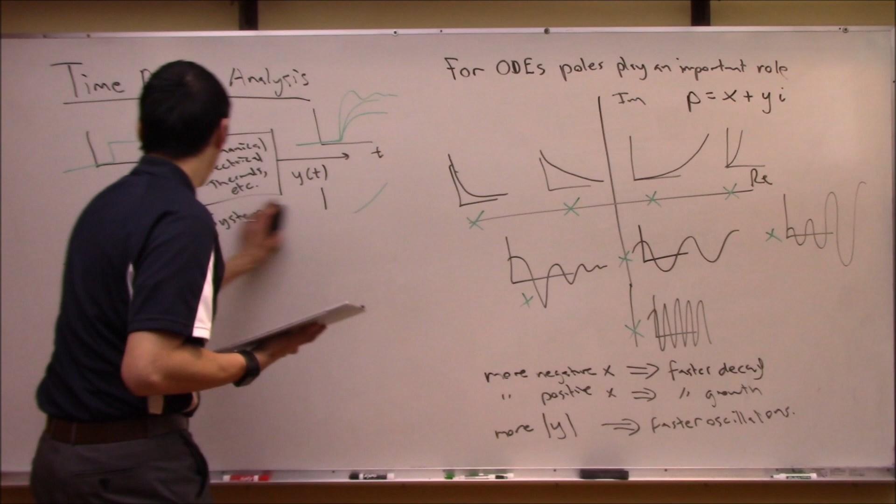So this is some flavor of time domain analysis here, but we would like to get a little bit more precise and make more careful predictions on what the system is going to do and how we're going to measure those performances. In this discussion, let's focus on first order systems. Before that, let's discuss some differences between the transient and steady state response of a system, because both play a part in our discussion of time domain analysis.

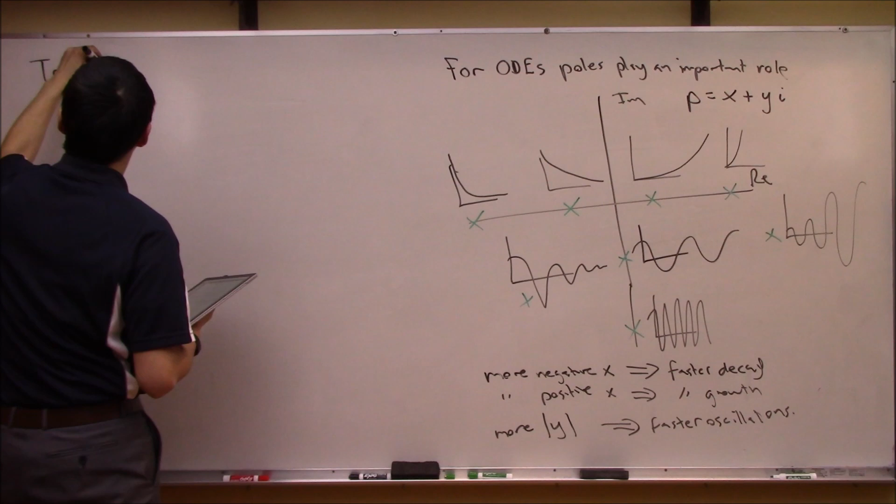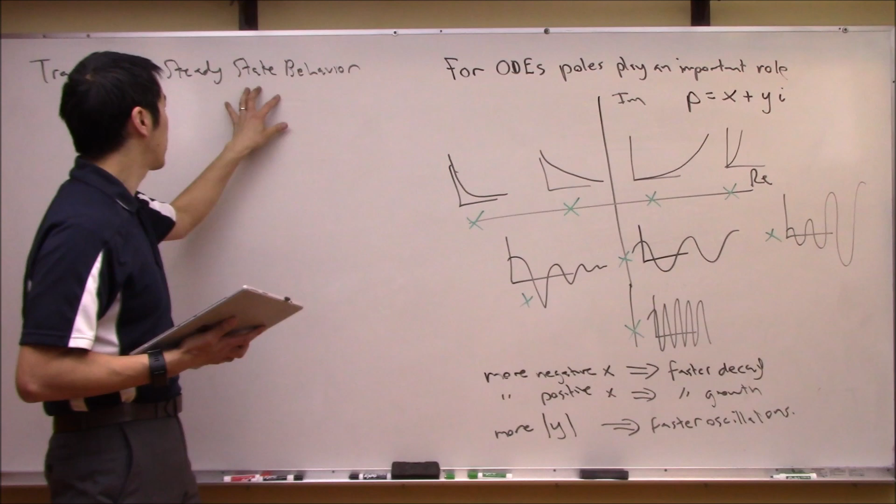We should talk about the terminology of transient versus steady state behavior. If you watched our previous videos on final value theorem and DC gain, you understand some of the steady state behavior, but we should formalize what we mean by transient here. Maybe formalize is a little strong, because you can explain these using very general terms.

The idea here is your transient response is basically the process of going from the initial state to close to the final state. So the process of going from initial state to steady state.

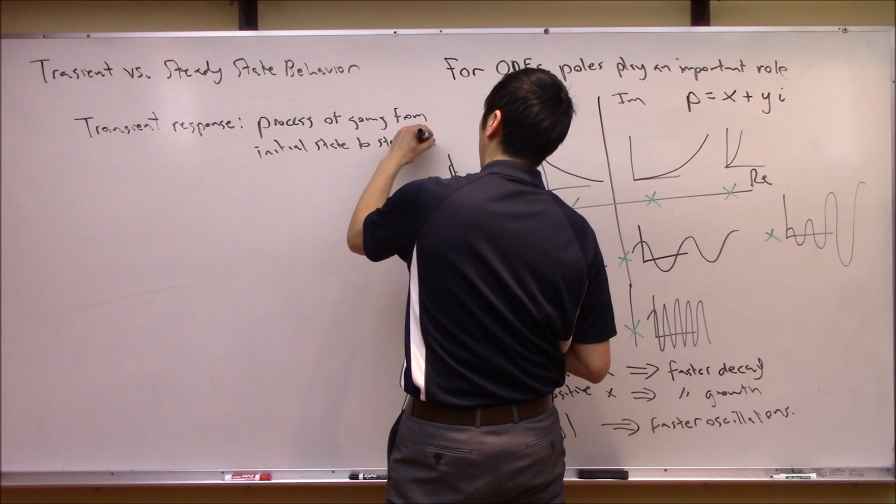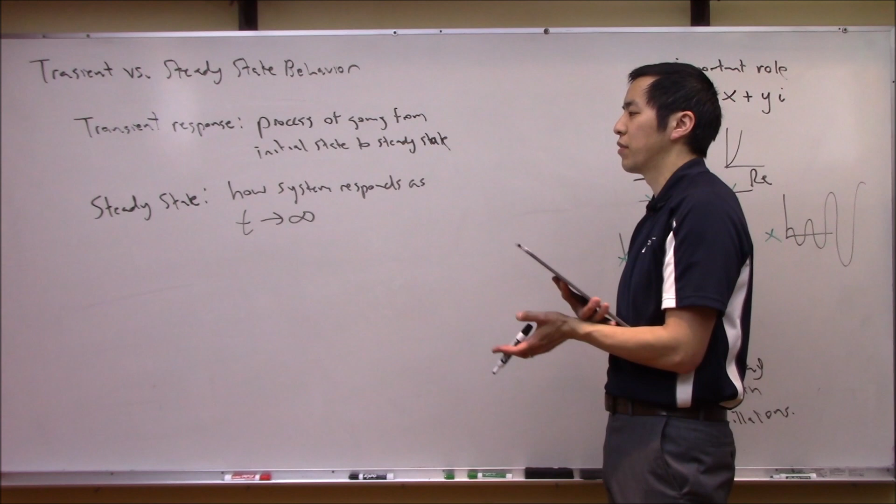The other half we want to look at is the steady state behavior. This is how the system responds as t goes to infinity, right? So as time grows large and some of these initial conditions or homogeneous solutions die away, what does the system do here? Let me give you a very quick graphical example of this.

Let's say you had some system here, and again we could model this as a transfer function or some ordinary differential equation. You put in some input, like a step input, and the output might look something like this. So here's y of t versus t.

In this picture, this portion of the response—it's not clear exactly where it ends—but this is sort of your transient. And then over here is the steady state response.

So you can see the transient has something to do with initial conditions or a difference between the input and the initial state. Maybe I should have drawn this with a negative initial condition instead. That's a little more representative here, because it shows you could have non-zero initial conditions and all this kind of stuff. But at the end of the day, all of those initial conditions and their effects should die away, and you should end up with some steady state behavior.

In this case, you see the system seems to go to a final value here, and this connects to our discussion of the final value theorem and DC gain of a system. But it doesn't have to be this way—your steady state behavior might not go to just a constant. You might have the steady state behavior of your system be a function instead.

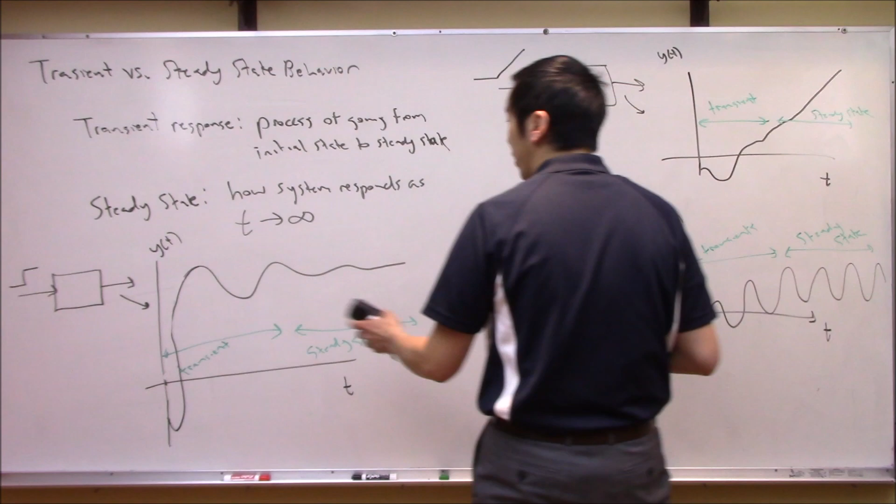All they're really talking about is predicting the behavior of the system without having to analytically solve the equations here. So you might wonder, do I really care about this? Is this really important? And the answer is yes, because if we're dealing with dynamic systems, both the transient and the steady state behavior are incredibly important.

The reason you've got to worry about this is, your system usually has to run in steady state behavior for the majority of the time.

However, you need to be able to get to steady state behavior without failing. So the system must be able to get to steady state without failing. In other words, it needs to get through the transient response safely without failing.

One urban legend I heard when learning this from my professor: back in the 70s at our university, there was a fraternity with a balcony on the second floor, and some students decided to start their own bungee jumping expedition. So what they ended up doing was tying a bungee onto it, and they weren't the smartest, but they weren't the dumbest students either, so they knew they had to test this thing first.

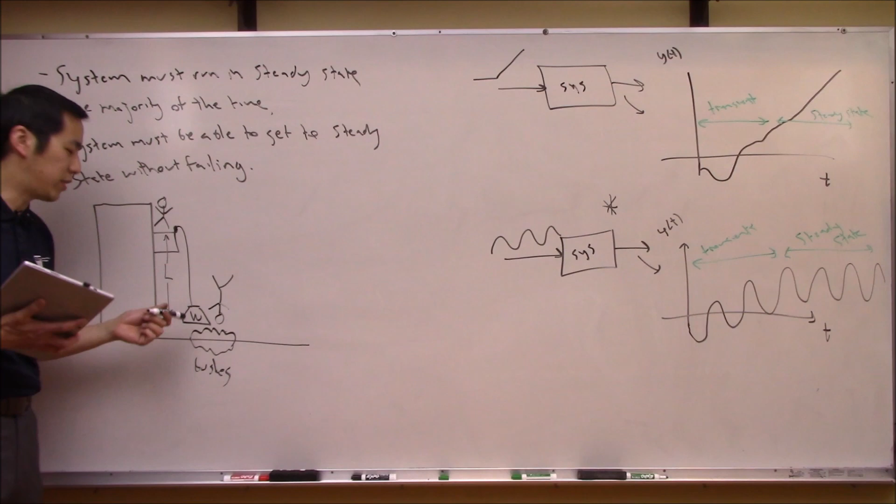And what we want to do with time domain analysis is understand: is there a way we could have predicted how much overshoot or how long it would take to settle, before you actually go out and build your system?

All right, here we are on top of the second floor balcony. Let's measure out how much rope we're gonna need to make this bungee jump. I think I remember from my statics class that at steady state equilibrium, the force from the bungee should equal my weight. So let's go ahead and lower myself down slowly, and once I reach the ground, that'll tell us how much rope we need. Here we go. Keep it going, dude. A little lower, a little lower. There we go, that's perfect. Look at that, this is gonna be so sick. This is exactly the right length of bungee cord so it's steady state equilibrium, we're just gonna be hanging right here above the concrete. Okay, let's bring it back up and give it a try. All right, here we go. Wish me luck, dudes. Cowabunga! Uh-oh.

Okay, so we saw why transient analysis in combination with steady state analysis is important. So what I want to do now is consider first order systems, and look at doing time domain analysis for just this type of system. Later on, in one of our following videos, we'll talk about second order and higher order systems, but I think it helps to start with the simplest system and work our way up from there.

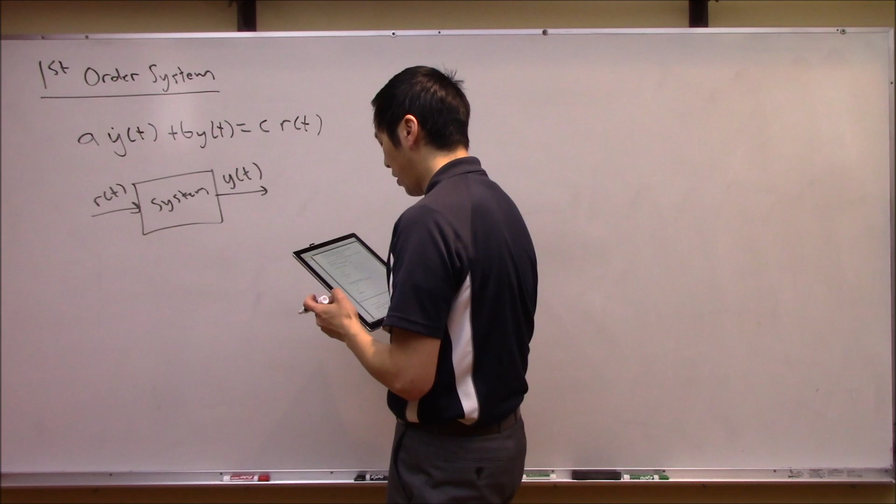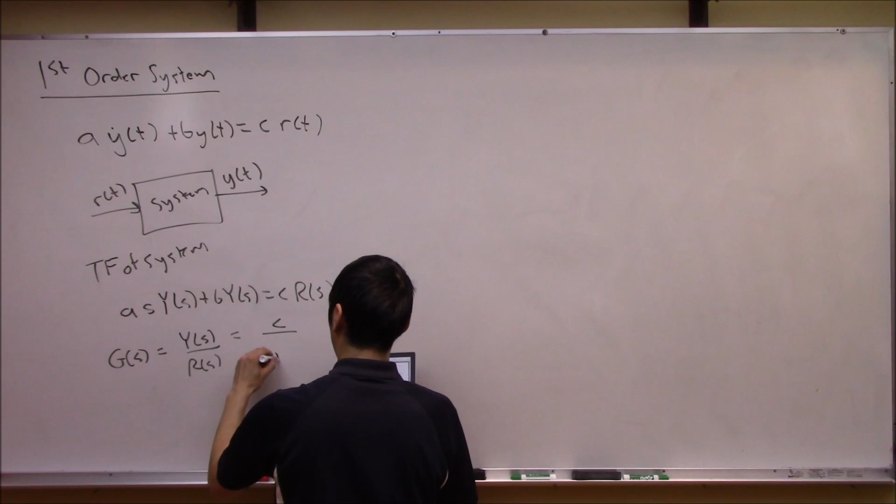We can easily compute the transfer function of this system. If we Laplace transform both sides and neglect initial conditions, we get a s y of s plus b y of s is equal to c r of s. If we solve now for the transfer function, which is the output over the input, we can get this thing to look like c over as plus b. So here's what our system looks like. Maybe the other way we could represent this is instead of just calling this system here, we call this thing c over as plus b.

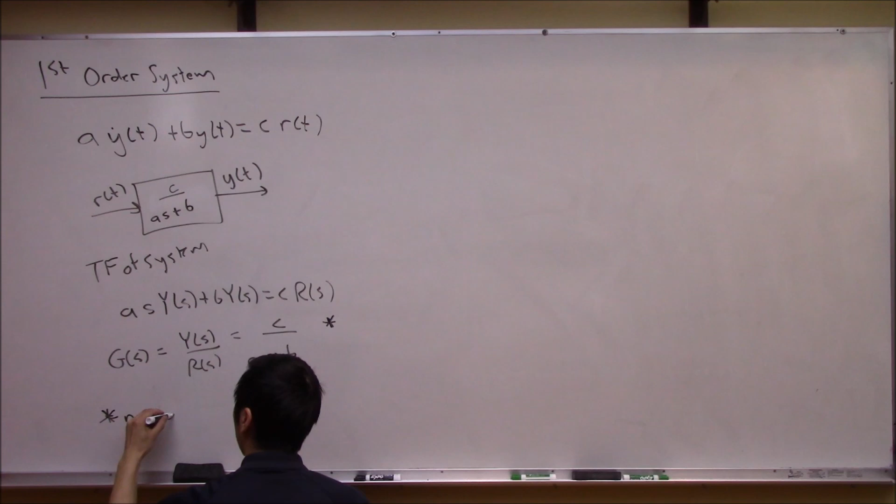The thing I do want to mention here, and keep in the back of your head, is that with our transfer function, we neglected initial conditions. We will come back to that in a second and show that this is of no real consequence, but let's put a little asterisk here and note that we neglected initial conditions.

Okay, so what we can do here is a couple of things. First off, let's make a quick note that the DC gain of the system - remember from our previous video where we talked about DC gain, we saw that you can obtain the DC gain of a system by just taking its transfer function and evaluating it at s equal to 0. So we see that the DC gain of this system is not unity, it's c over b. Let's keep that in the back of our head.

Okay, so what we can also do now is start looking at the performance of this system, or some metrics that might quantify how this system behaves in both transient and steady state. So one of the steady state parameters we can look at is steady state error - in other words, how does the output track the input at steady state? From our previous discussion where we talked about DC gain, we saw that the steady state error of a system in response to a step input, for any order system, first, second, whatever, is this here. So this is steady state error, and we should quantify this with respect to a step of magnitude A.

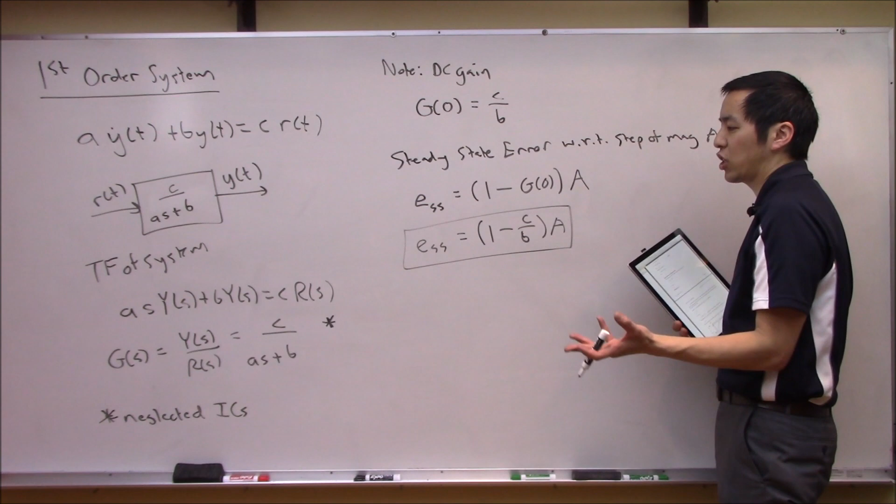Okay, so we just put this in here. We already have the DC gain, so we have this is 1 minus c over b times A. So here's our steady state error. Okay, you could box that up and say here's some performance metric, or here's some prediction of the system that we didn't actually have to solve for. If you know these c, b, and A, you can plug it in right away and understand the steady state behavior, the steady state error of the system.

Now, let's look at something that's a little bit more interesting. Tell you what, let's erase this so we get a little bit more real estate here. Let's look at what we're going to call the settling time.

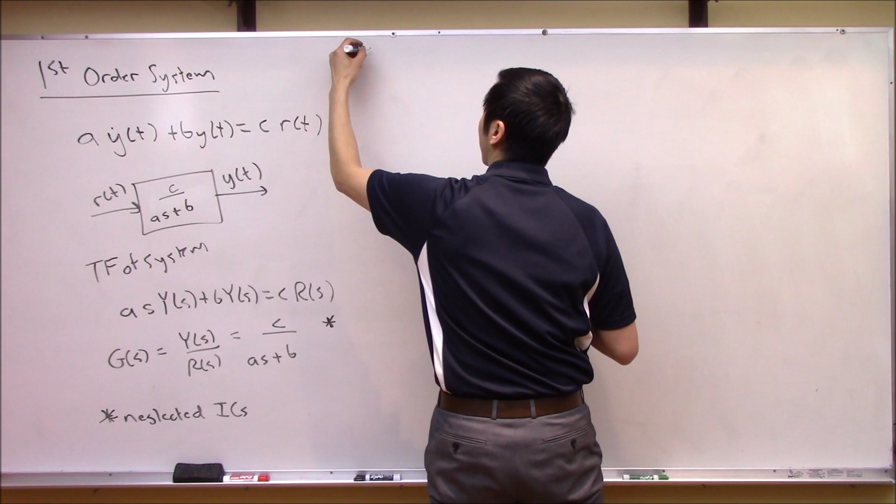Let's call this TS. So the settling time is basically the time required for the system to reach within a specified bound. Let's call this bound delta of the final value.

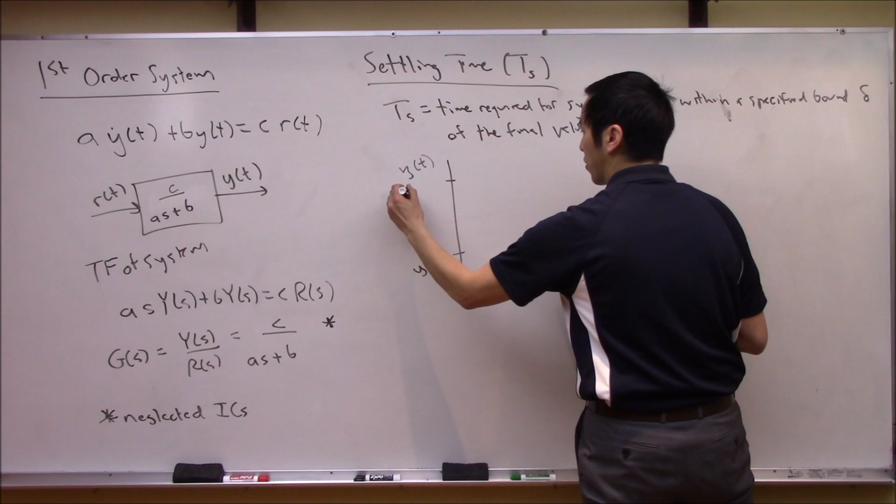So the picture that goes along with this: if you have a first order system, we know what this is going to look like. You start at some initial condition y0, some initial output, and this thing is going to go to some steady state value. We just saw it has a DC gain, and assuming the input is a step input...

This is going to asymptotically approach this. So what we see here is that there is a change in signal going from the initial condition to y steady state. Let's call this distance delta y, your change in output signal.

What we're looking for now is when does this response of the system reach some bound? I'll draw it like this, and it can go plus or minus if you're coming in from the other side. The distance between the steady state value to one end of this bound is little delta times big delta y. So this entire region here is 2 times delta times delta y.

So the settling time is this point right here, when it first reaches within this bound. So the settling time is this value here, again assuming everything starts at time 0.

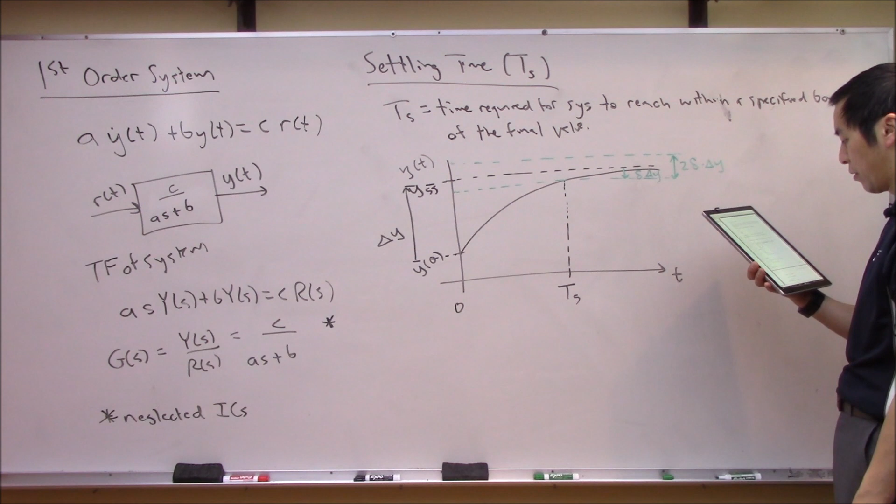One other thing that would be helpful with this picture: if this is delta y and this little region here is little delta times big delta y, then this distance right here, I think we'll all agree, is 1 minus little delta times big delta y.

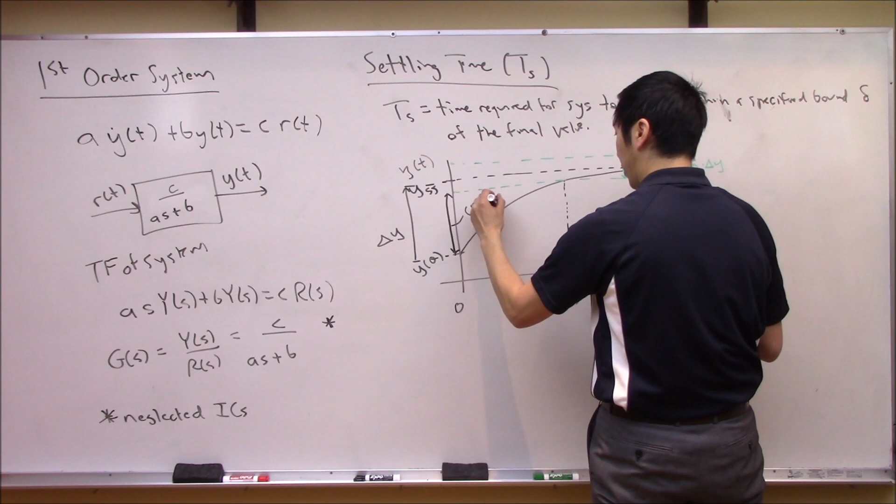So what we need to do here is solve for settling time. The first thing we need to do is get this curve of y of t versus t. So to do that, let's go ahead and get y of t. To get that, we are going to take the system here.

Where was I here? Oh, okay, yeah. Where did I put the initial condition part? Oh, okay, well, no, sorry. Tell you what, let's do this first. We're going to get to the initial condition later. There's more than one way to skin this cat. So let's just first look at this from just geometry. Well, I guess it's not really geometry here, but from all of this.

So we saw that y at the settling time, where is that? That's this value right here, so this here is y at the settling time. That value, I think you'll all agree, is y0 plus this distance right here, which we just said was 1 minus little delta times big delta y.

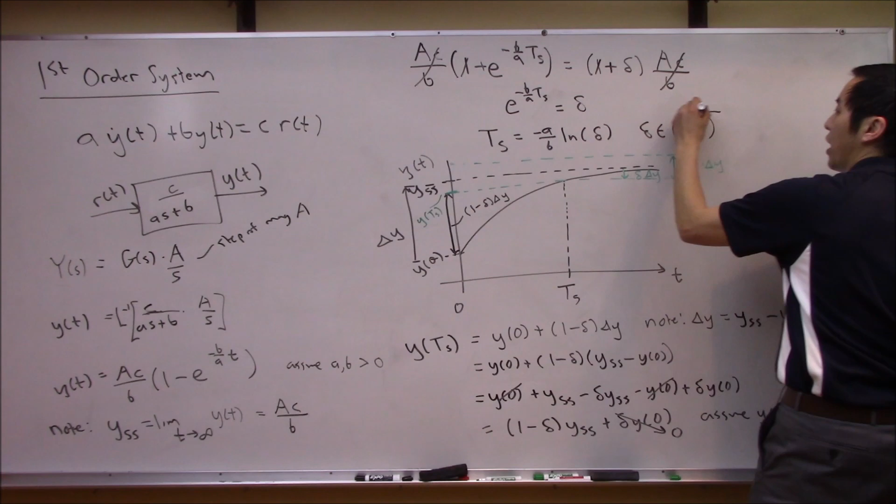So this boils down to: e to the minus B over A times settling time is equal to delta. Take the natural log of both sides, and with a little more manipulation you can solve for settling time, giving settling time equals negative A over B times the natural log of delta. In this case, delta is in the range of 0 to 1 — actually we should make these non-inclusive bounds so we don't run into infinity. So here's our expression for settling time.

This is really awesome, because now if you want a settling time, for example, within say 2% of the final value, you would choose a delta of 0.02, corresponding to 2% of the steady state value.

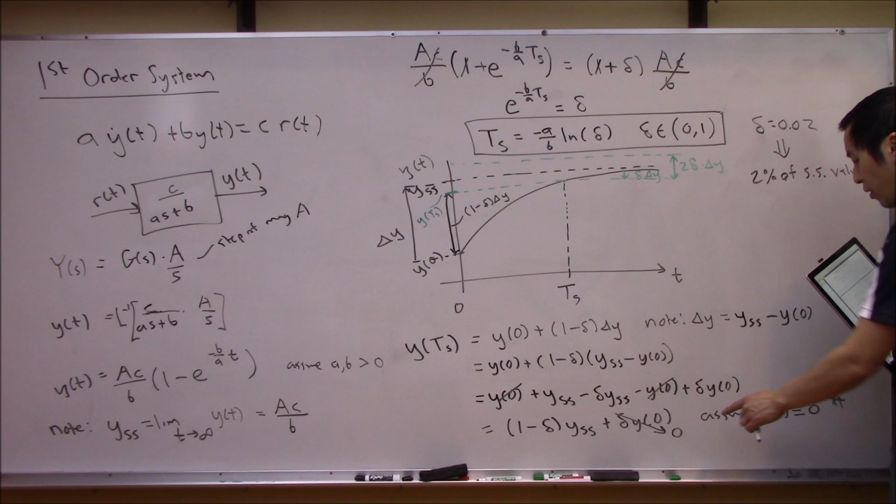Okay, the thing that might be bothering you here is that we made the assumption that the initial conditions are zero. But surprisingly, we'll show later in an example that this result is still true as long as you define the change as the difference between the steady state value and wherever your initial condition is. So luckily for linear systems, this still holds even if your initial condition is not zero. That gives us an expression for settling time.

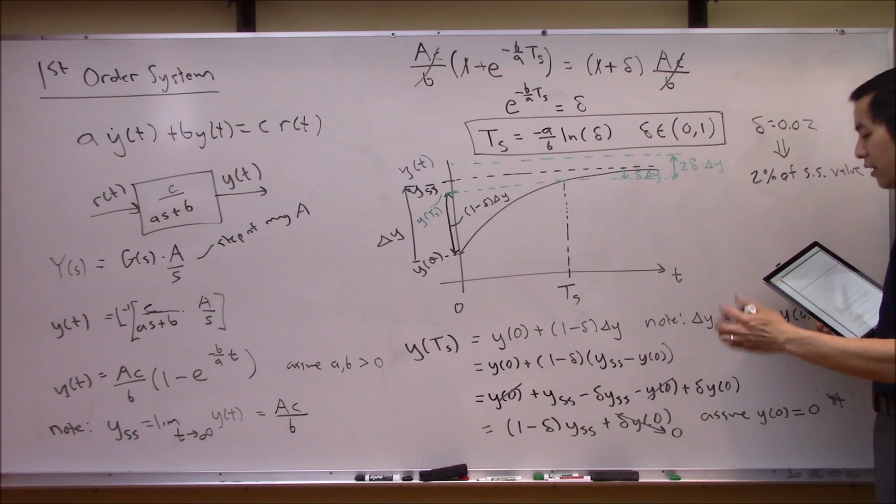Let's look at one other expression: how about rise time? Rise time is defined very similarly to settling time, but it's basically asking how long does it take the system to get to a certain value. Let's call this TR.

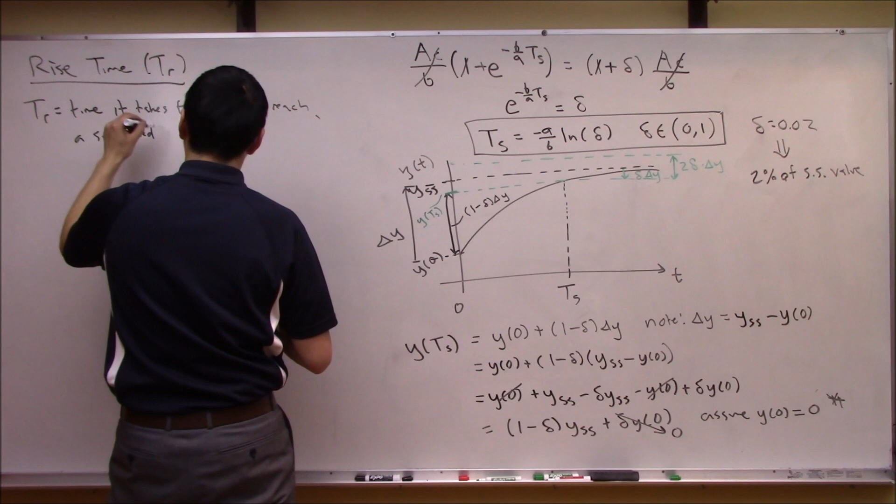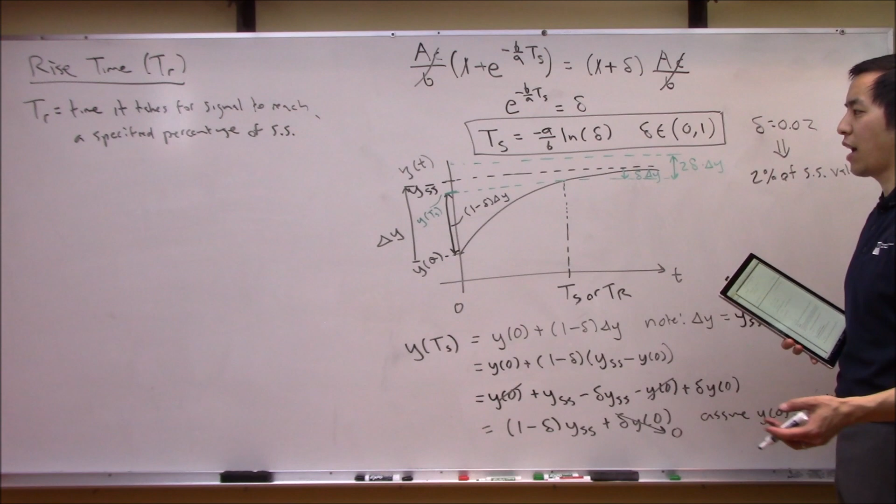This is defined as the time it takes for the signal to reach a specified value or specified percentage of steady state. So in this picture with the first order system, if you think about it long enough, the picture is identical. There's actually no difference between settling time and rise time here. So you could easily call this settling time or rise time. The derivation is the exact same. You're still looking for how long does it take to get from the initial condition up to some value.

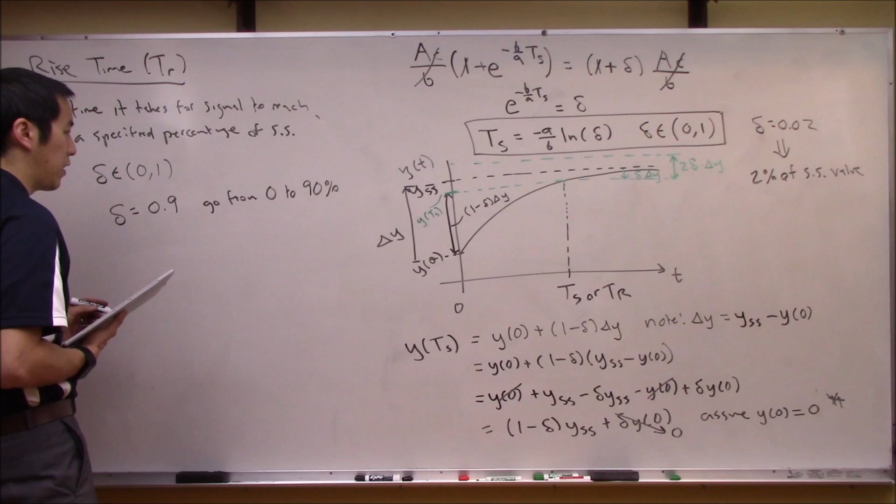The only thing that's slightly different is that delta is typically in the range of 0 to 1, not inclusive. A delta of 0.9 is saying go from 0 to 90%. So the delta in the rise time case is basically 1 minus the delta in the settling time case. The result is the same, we just define delta a little differently, because the 90% rise time is the same thing in the first order system as the 10% settling time.

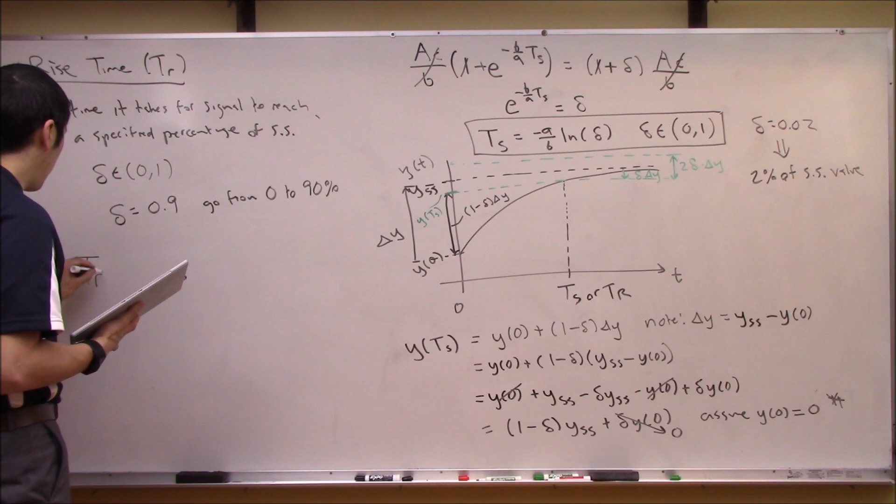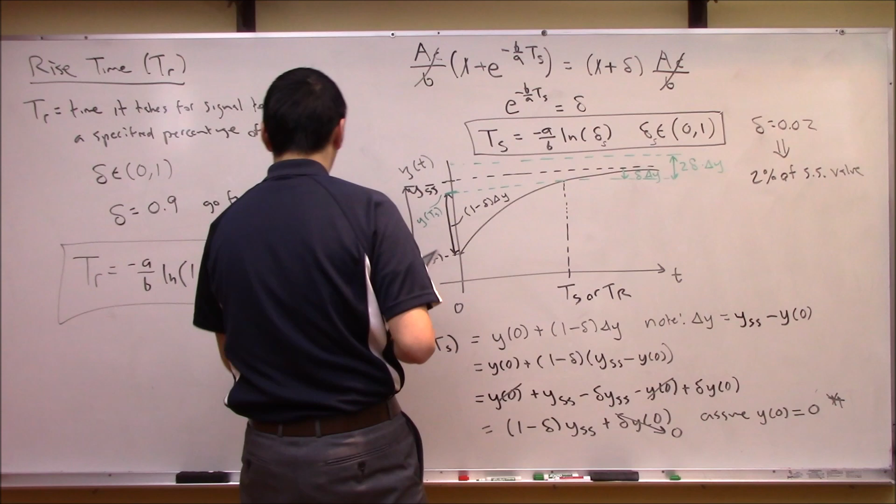So rise time is the exact same: minus A over B, natural log of 1 minus delta, and delta is in 0 to 1. Maybe we should use different deltas here - this delta for rise time, and this delta for settling time. That makes a bit more sense, but it's basically the exact same thing.

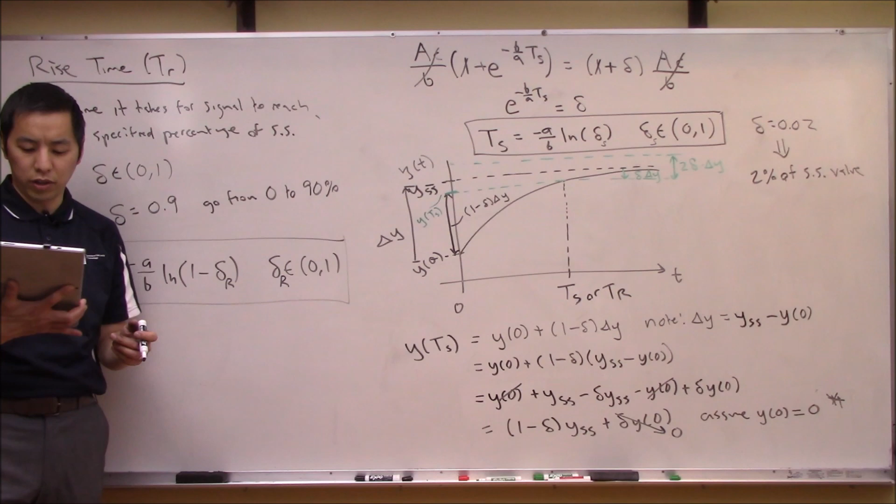So this result here was in response to a step input of magnitude A. Why don't we go ahead and repeat some of this analysis and look at how a first order system responds to, say, a ramp function. Give me a minute, I'll pause the video, erase the board, and we'll come back and look at a ramp.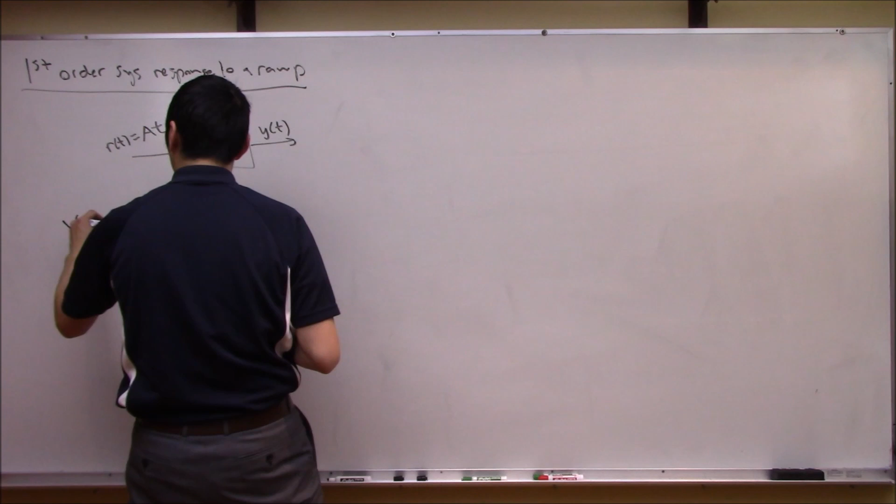Okay, so why don't we do the same thing and look at the first order system response to a ramp. Same picture here where you've got our system G of S, but now let's assume the input is going to be a ramp, something like AT. I want to get the response here and do some time domain analysis on this system. The way we go about that is just like always: let's compute the response of the system. So y, in the Laplace domain, is just G of S times the ramp, which in the Laplace domain is A over S squared.

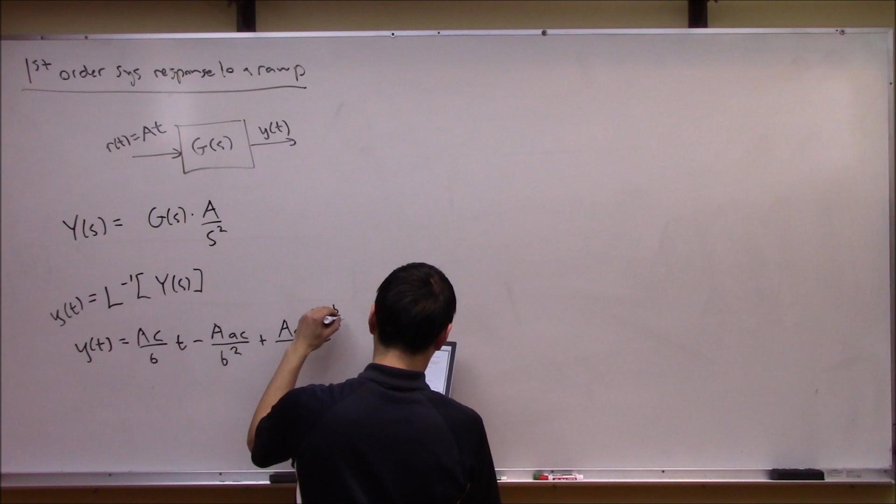So you plug in your G, and what we'd then do is go ahead and take the inverse Laplace transform of what we end up with. I'll spare everyone the algebra here - run over to Mathematica to do this if you'd like - to get the response of this system in the time domain. If you do that, you end up with y of t equal to AC over B times t, minus A AC all over B squared, plus A AC over B squared times e to the minus B over A t. So here's the response to the ramp.

Okay, so what's interesting is if we assume that A and B are both strictly positive, at steady state this term goes away. So we see that Y steady state is actually a function of time, but it looks something like this: AC over BT minus AAC over B squared.

Okay, so here's the steady state behavior. We notice here that it is not a constant value. It's basically, this looks like y equals mx plus b. So it looks like an affine or a linear line.

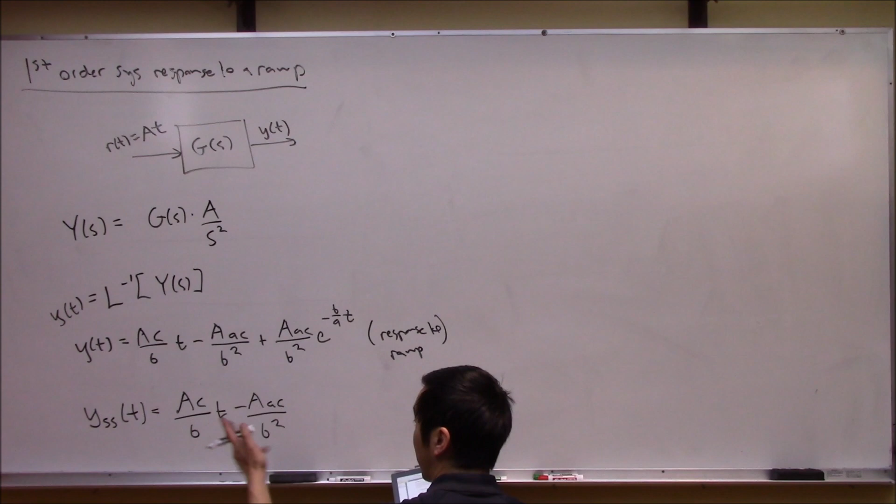Now let's go ahead and look at the steady state error. How does the steady state output differ from this input? So the error in steady state, we said that was r of t minus y steady state of t. And we know the input reference was a ramp. So this is AT minus the steady state response, which is this down here.

So this is minus quantity AC over BT minus AAC over B squared. Okay, so you simplify this thing down and you can basically get this massaged down to look like big A minus AC over B T minus AAC over B squared. So again, this is in response to a ramp.

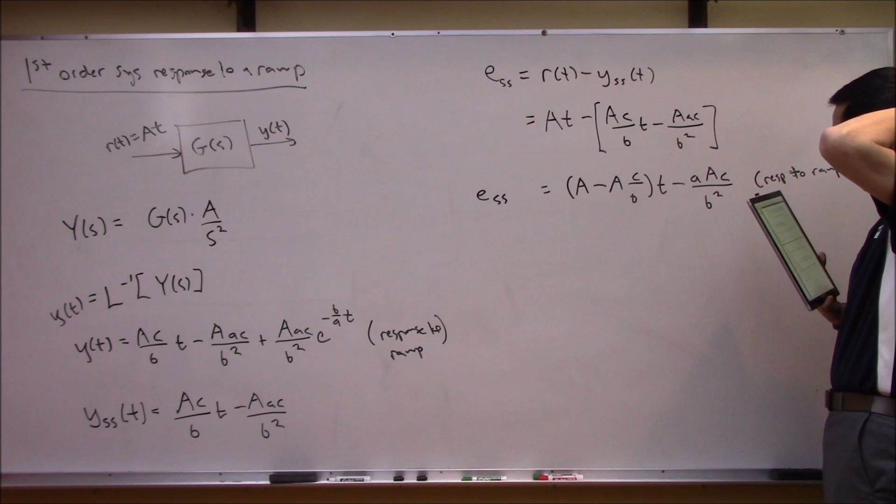So you notice a couple of things. The steady state error has the potential to actually grow in some situations. So what that would mean is if your input here was something like this, here's R of t, your steady state behavior, y, it might do something like this. And the error at any given point might just grow.

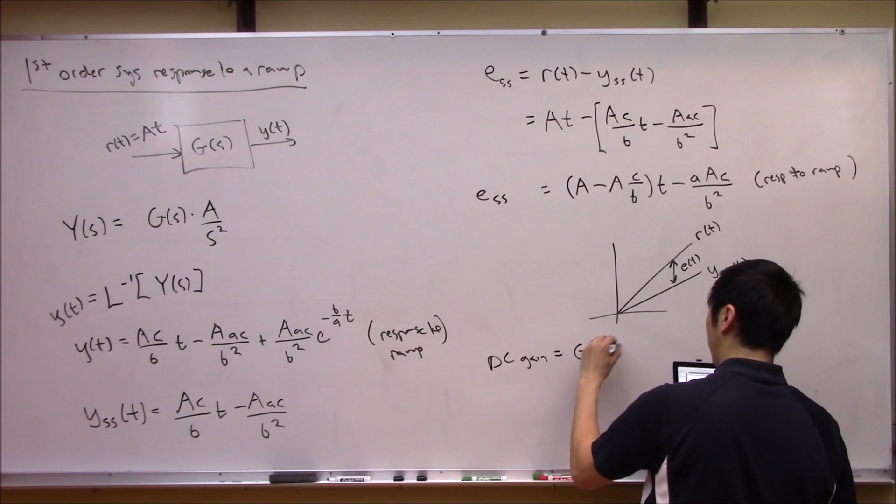What's interesting here is if C over B was 1, this would be gone, and we would end up with just a constant steady state error. What's actually even more fascinating is if you remember the DC gain of the system, that was G0, that was actually this quantity C over B. So we can see that if your DC gain is unity, basically 1, in response to a ramp you end up with constant steady state error.

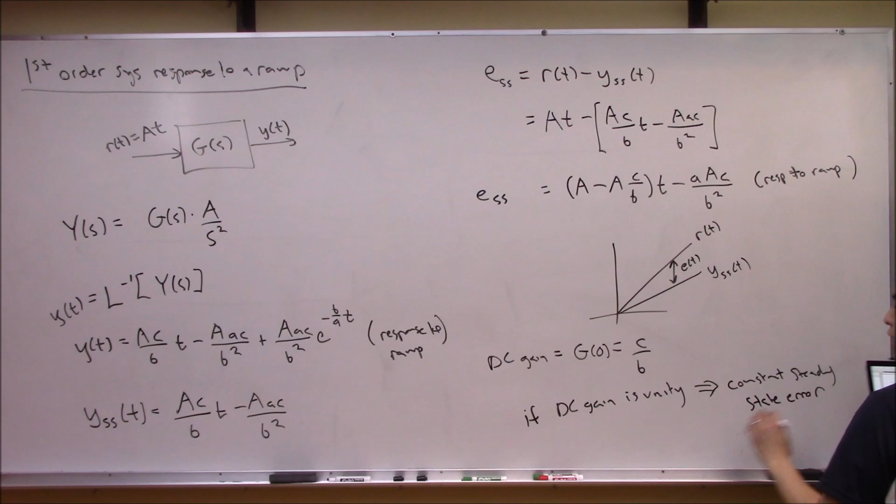In all other cases, if the DC gain is not unity, your steady state error is actually going to be growing, or potentially shrinking as well. Well, let's just leave it at that.

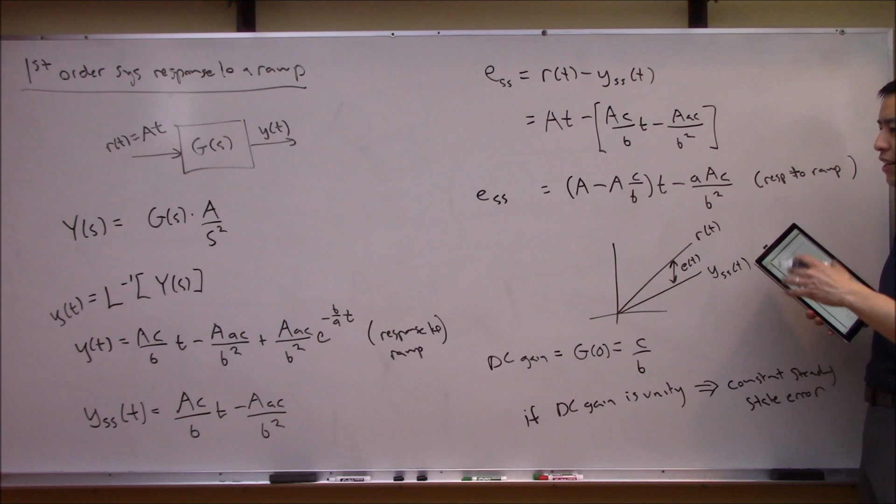So I want to look at an example now here. Let's look at a real physical system. We'll examine the two cases we just did: one, subjecting the system to a step input, and second, subjecting it to a ramp input. So to set the stage for these examples, let's pause the camera here, get away from the whiteboard, and head over to the stove.

Okay, so I'd like to explore a real-life response of a system to a step input. The system in question is a thermal system. We are going to have a pot of hot water. You can see I've got the water boiling over here. I'm going to pour it into this pot, so this pot will be at some temperature. Then I'd like to have some kind of thermal sensor, like a thermocouple, at a much lower temperature, and I'm going to dump it into the hot water, which is basically subjecting that temperature sensor to a step input.

So why don't we go ahead and do this real fast. Let's go ahead and put on a little hot mitt here, and let's go ahead and pour in the water to the... whoa, crud. Whoops, all right, don't tell anybody about that. Okay, hold on, it's going, there we go. The water's hot, it's boiling. Okay, so we got the hot water here. Let's turn off the stove.

Now what we want to do here is, I wish I had a thermocouple, I guess I don't here. As you know, a thermocouple is just a temperature sensor. So what I want to do is dunk it in and watch the temperature increase. But since I don't have a temperature sensor, I guess what I can use is my gloved hand. I'll just dunk it into the hot water. I don't think anything's really going to be that bad. But as you can see, my hand is at normal body temperature, and the water is at much higher than body temperature, so I'm basically going to be subjecting my hand to a step input in temperature.

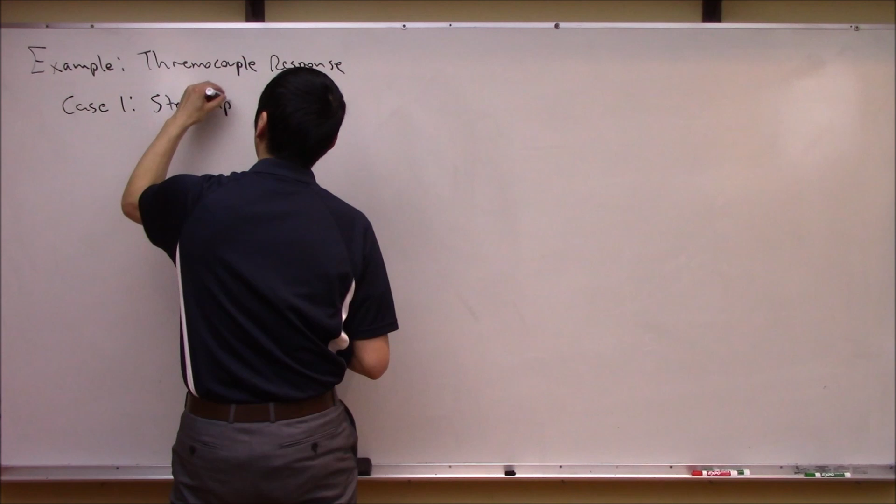The first case I want to look at is the one we just did. So let's look at a step input, and we'll do some time domain analysis on the signal. The picture that went along with this is we saw there was a pot of hot water here.

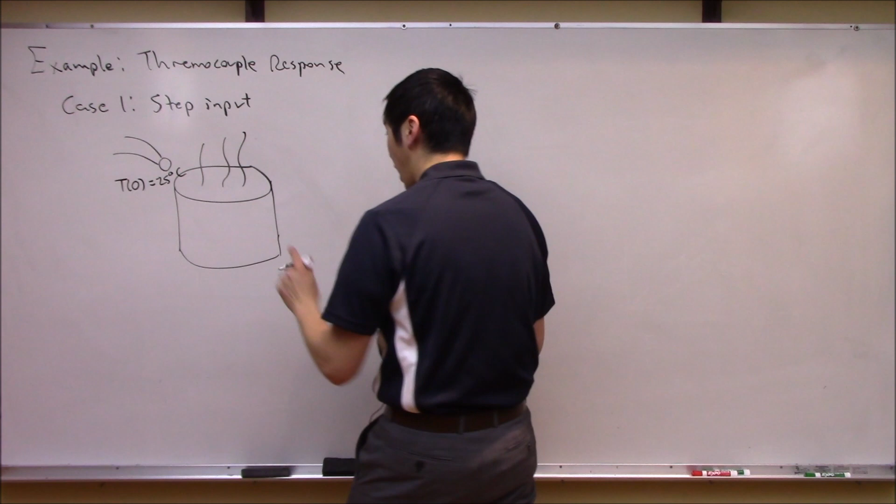This thing, as we saw, was kind of hot. Let's draw some steam coming out of it. And we have our little thermocouple. As you guys all know, a thermocouple is just a small piece of dissimilar metal. Let's say this thing has an initial condition of maybe 25 degrees Celsius. And down here, this is our hot liquid.

For the purposes of this problem, let's say its temperature, call it T infinity, is going to be 400 degrees Celsius. Obviously that's not what we just had, but that's what we'll use for our example. So some thermal properties of this system that are going to be relevant here, properties of the thermocouple.

Some constants we'll care about: K, the material's conductivity — whatever it's made out of, let's assume this is 20 watts per meter Kelvin. Again, this is the material's conductivity. The specific heat, call that capital C, is going to be 400 joules per kilogram Kelvin. So this is the specific heat.

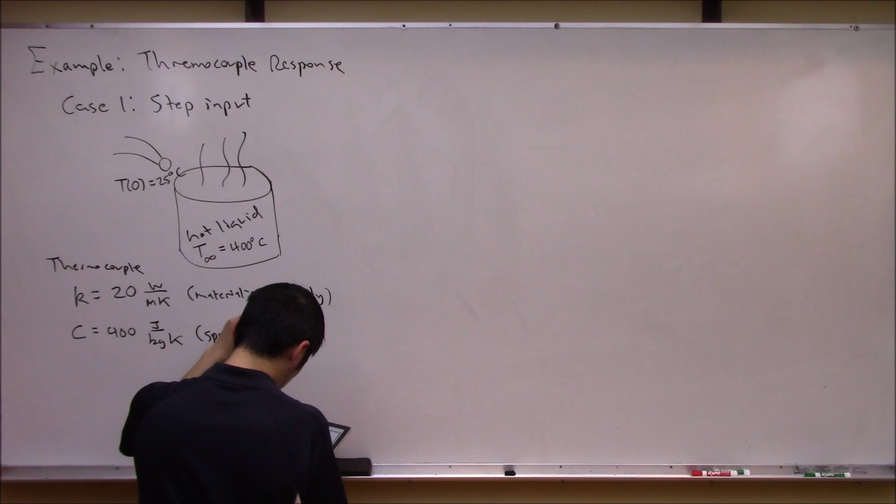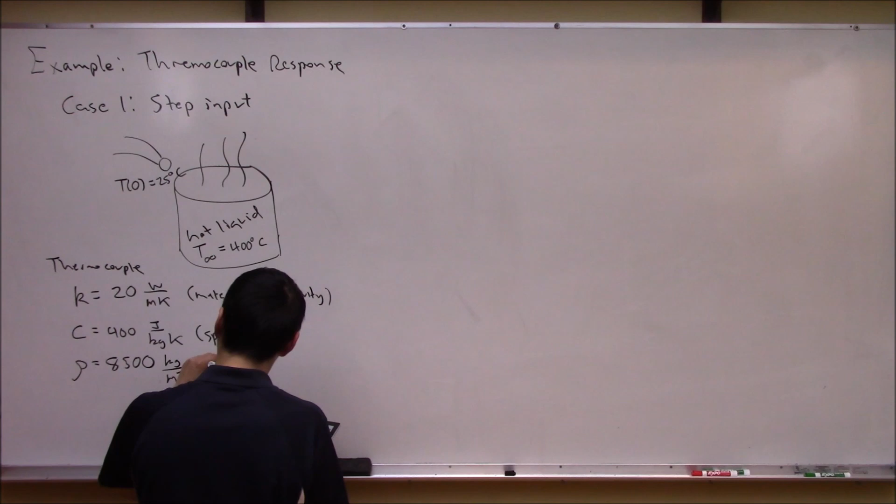The density of this metal, for the thermocouple, is 8,500 kilograms per meter cubed — again, the material density. And let's call the diameter of this 3 millimeters, so this is our diameter of the thermocouple.

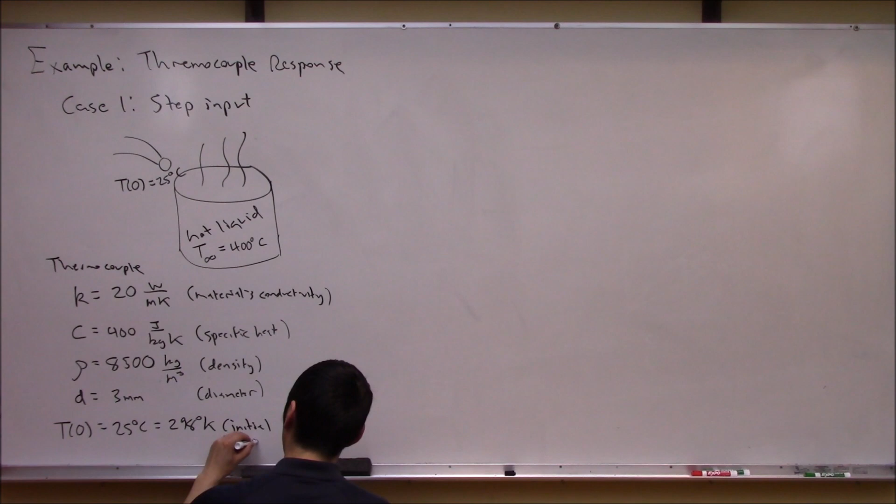We'll say the initial condition of the thermocouple is 25 degrees C. We better convert that to an SI unit of 298 degrees Kelvin. So here's our initial temperature. And then there are some properties of the water or liquid that we probably care about as well.

For the liquid, I guess I'll put it up here. Gosh, I wish I could have used the space a little better and kept everything in one spot, but alright, whatever — let's put it right here. How about for the liquid? Some values we'll care about here is the convective heat transfer coefficient, let's call that H, 400 watts per meter squared Kelvin.

So this is the convective heat transfer coefficient. And then the temperature of the liquid, let's call that T infinity, again 400 degrees C, or turning that into Kelvin by adding 273 gets us to 673 degrees Kelvin. So this is the liquid temperature.

Alright, so before we jump into the equations of motion, or at least the ordinary differential equation that's going to model this simple system, let's calculate a couple of secondary parameters that we're going to need here.

Secondary parameters, things like the volume of the thermocouple — that's just our good old friend 4/3 pi r, which is, I guess, diameter over 2 cubed. And again, maybe we should have converted that diameter — we probably should have put this in meters. What is that, divided by 1,000 to get it in meters here.

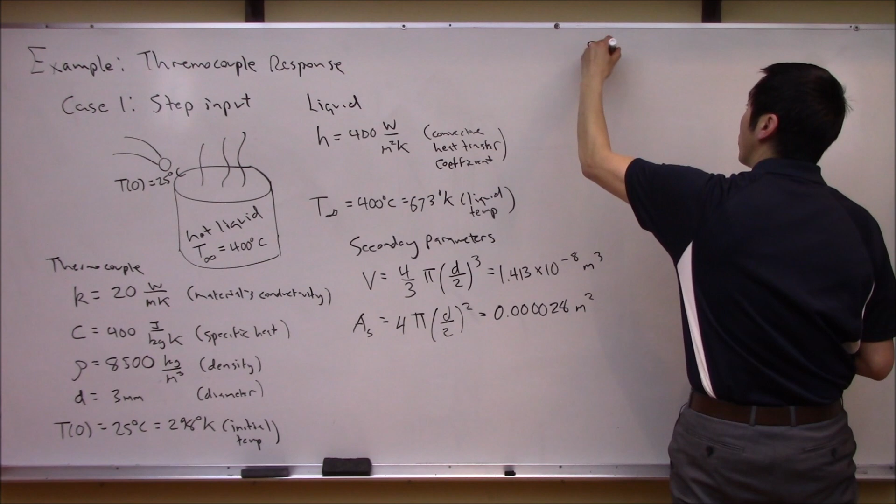Getting the equations of motion here is outside the scope of this discussion, but I'm going to post another lecture on dynamical system modeling of thermal systems. As you may have seen in other lectures, thermal systems are a partial differential equation because it relates both time and space. But if the system is simple and one-dimensional enough, the spatial component drops out, and you can model this scenario as just a simple ordinary differential equation, an ODE. That's outside the scope of this lecture, so I'm just going to write up what the equation of motion would be.

So basically what you get here is the temperature of the thermocouple, capital T of t. That's what we're interested in, right? Its temperature is written down as a differential equation. So we can say dT/dt, where capital T is temperature and lowercase t is time, plus beta times temperature of t is equal to beta times T infinity. That's about it. So this is an ordinary differential equation.

So in this case, T of t is the temperature of the thermocouple. T infinity is the step input in temperature, because you drop this thing into this hot pot of 673 degree Kelvin liquid. And finally, beta is this coefficient that, if you had done all of the thermal analysis, you would get, which is basically a mishmash of all of these constants put together. So this is H times the surface area, all over rho V times the specific heat C.

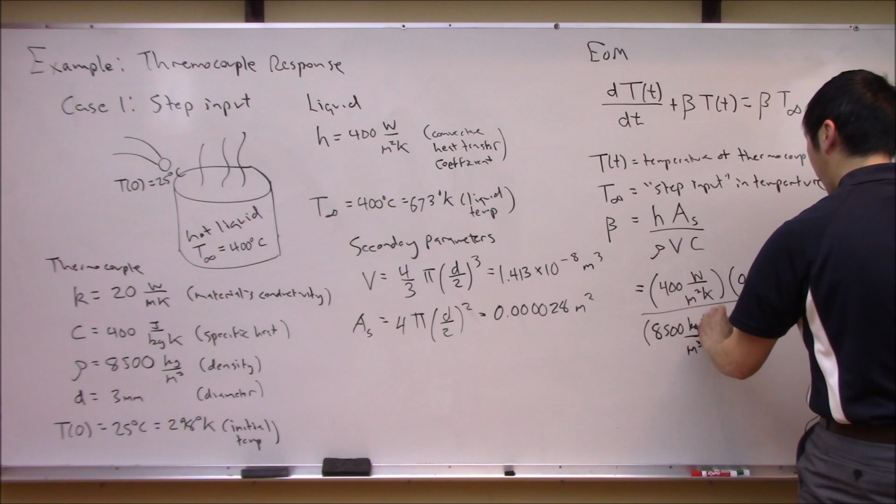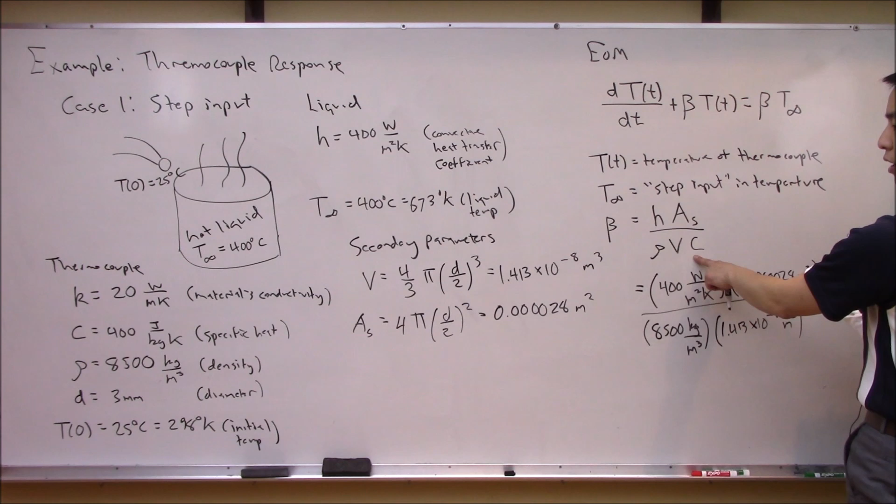That was just a lot of zeros there, I want to make sure I get all of this right. Let's just do this: 0.000028 meters squared. All over the density of this thing—actually the density was large, right, it's metal, pretty dense—8,500 kilograms per meter cubed, times the volume of the thermocouple which we computed, 1.413 times 10 to the minus 8 meters cubed, and then times C, which was our specific heat of the thermocouple, 400 joules per kilogram Kelvin.

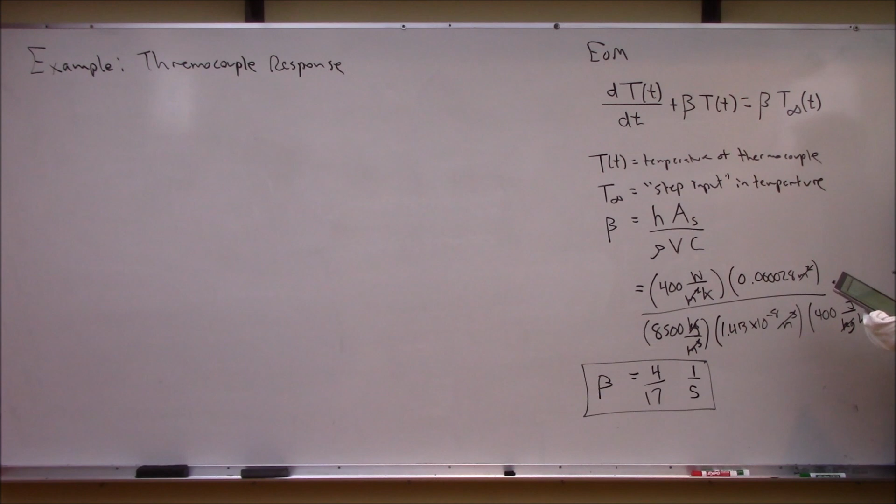Let's get the transfer function of this system, because we're looking at the step input. Actually, maybe over here in the differential equation, I should have written this as T infinity of T, the temperature of the liquid, which could be changing. Later on, we're going to look at the case of a ramp, so this doesn't have to just be a constant. We've got our minds so wrapped around the constant that I dropped the sub T notation, but we really should say that this is the input to the system: the temperature of the liquid.

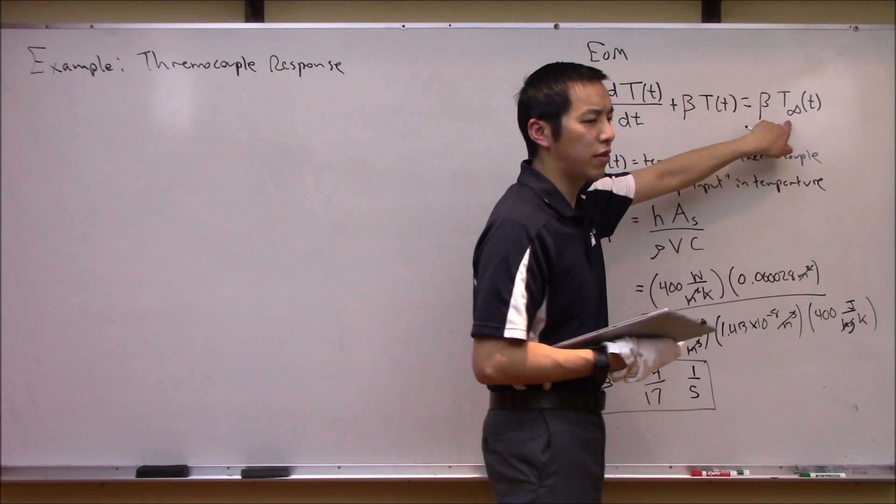So the transfer function of this system: we want to get our transfer function G of S, where the input to the system is T infinity, and out of this comes the actual temperature of the thermocouple. It's really easy, just Laplace transform that. In the interest of time, let's skip all of those steps since you've seen it many times before. Just Laplace transform this and solve for the ratio of T of S over T infinity of S, now in the Laplace domain. The transfer function you get is beta over S plus beta.

So a couple things we can do right off the bat: let's get the DC gain, which is just G of 0. If you see this, it's just beta over beta, so this is just 1. So the DC gain is 1, which kind of makes sense if you think about this: if you drop this thermocouple into some temperature and let it sit long enough, eventually the temperature of the thermocouple will equalize to the temperature of the liquid.

So in a similar sense, we could also look at the steady state error of this system in response to a step. We said this is just 1 minus G0 times the magnitude of the step, and since this is 1, we see this is 0. Again, it's telling us the same story as the DC gain: eventually there's going to be no steady state error and the output will equal the input.

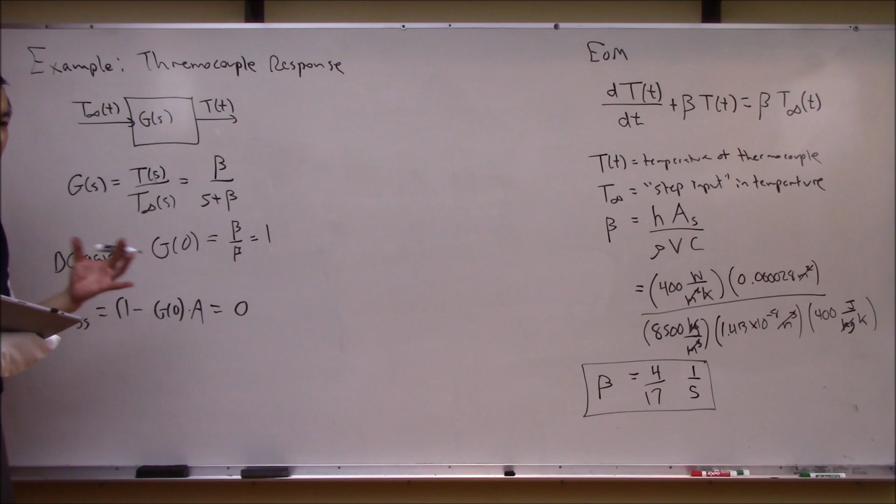Now, that's fine and dandy at steady state, but the whole point of time domain analysis is we want to know how long it's going to take to reach that steady state. So how about let's calculate settling time.

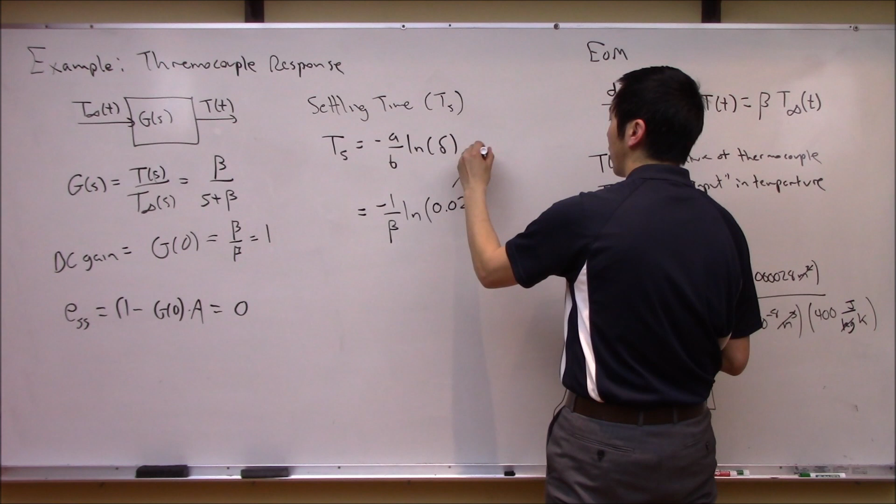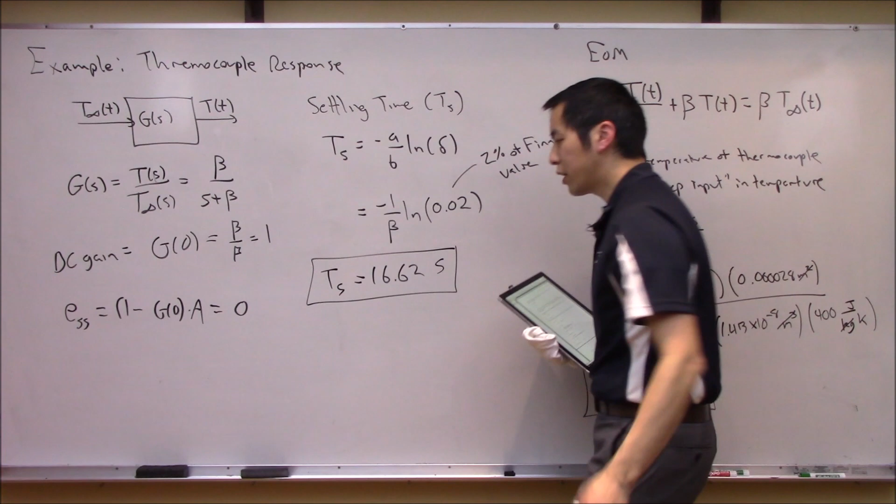Okay, so beta, we already know what beta is: it's 4 over 17. You put this in here, crunch the numbers, and at the end of the day what we end up with is 16.62. Let's think about the units: we said the units of beta were 1 over seconds, so the units of 1 over beta should just be seconds, which makes sense since we're calculating a settling time. So theoretically, you dump that thermocouple into that pot of super hot water, and if you want it to get within 2% of its final value, you have to wait 16.62 seconds. How about rise time?

Okay, so rise time is a very similar calculation, because for our first order system, settling time and rise time were basically the exact same thing. So again, it's minus a over b times natural log of 1 minus delta rise. The only difference was now this delta here for rise time means something a little bit different.

So again, here's our coefficients, minus 1 over beta times natural log of, how about let's use 90. So we want to know how long does it take the system to go from 0 and rise up to 90% of the final value. So I put in, I want 90% rise.

Okay, so again, you crunch all these numbers here and we end up with a similar answer. So we end up with 9.79 seconds. So this is our rise time. Okay, great. That's what we end up with.

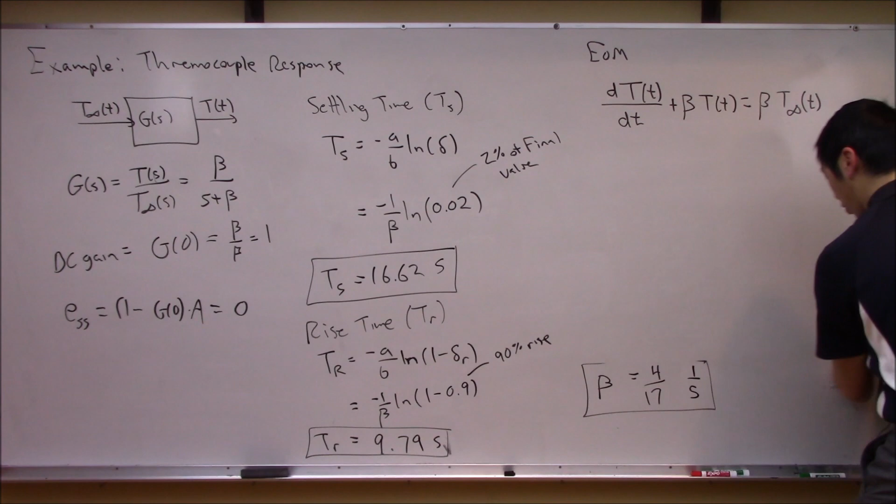And again, if you went over to Mathematica, and I'm not going to do this right now because I don't want to break our stride here, because I think we're really trucking along and this is some interesting analysis. But if you went over to Mathematica and plotted the output of this, let's just do this here. I'll write out the very simple Mathematica code that I want to do. Feel free to plug this in if you want. So you've got your g of s times the step input.

Which was t infinity here, which I think we said was 673, over s. This is a step input here. So this term right here is a step input of magnitude 673 degrees Kelvin. This is going to give you y of s, or sorry, not y, in our terms this was capital T of s. That was the temperature. This is how the temperature of the system responds to this kind of a step.

And then the next thing you want to do here is inverse Laplace transform T of s, going from the s to the time domain. This would give you, oh gosh, we ran into like a variable collision here. Let's call it temperature as a function of time.

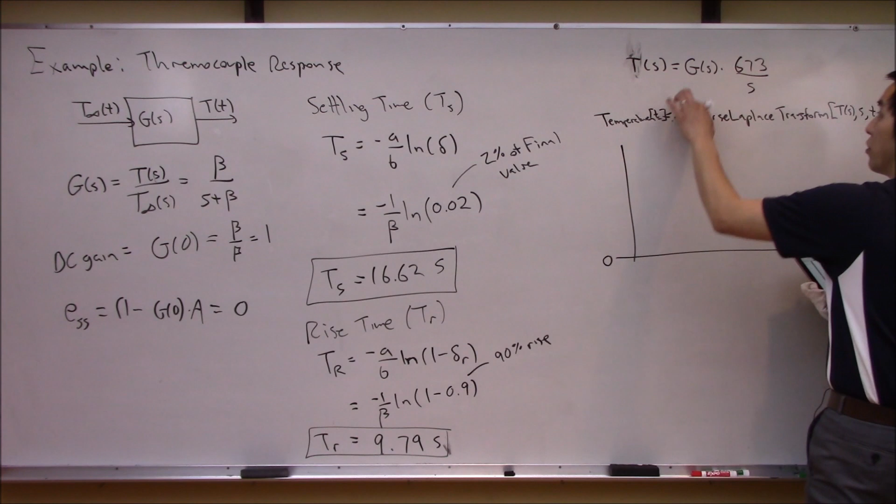And if you were to plot this thing, you would see it would start at 0, because we're using a transfer function here. So the transfer functions have no initial conditions. And to get up to 673 Kelvin, it would do something like this, where it would asymptotically approach this.

And according to our calculation here, to get within 2% of the final value, this delta here, this is 0.02 times 673, because that was a change here. This time right here was going to be 16.62 seconds.

And the rise time to get to 90% of it, which is another line, maybe I should have done that in a different color, just to make this a little bit more visible. Maybe let's do this in green. This here is, I guess, 0.1 times 673, because that means this rise here is a 90% rise. So this time where it crosses that line, this was our 9.79 seconds.

Okay, great. So again, everything would look good here, but maybe the one thing that's now kind of hopefully in the back of your mind that's making you scratch your head or maybe giving you a little bit of pause is the concept of, we started here at 0 with this analysis with the transfer function. And if you recall, the way we derived these expressions for rise time and settling time were assuming 0 initial conditions. In this case, though, the initial conditions were most definitely not 0.

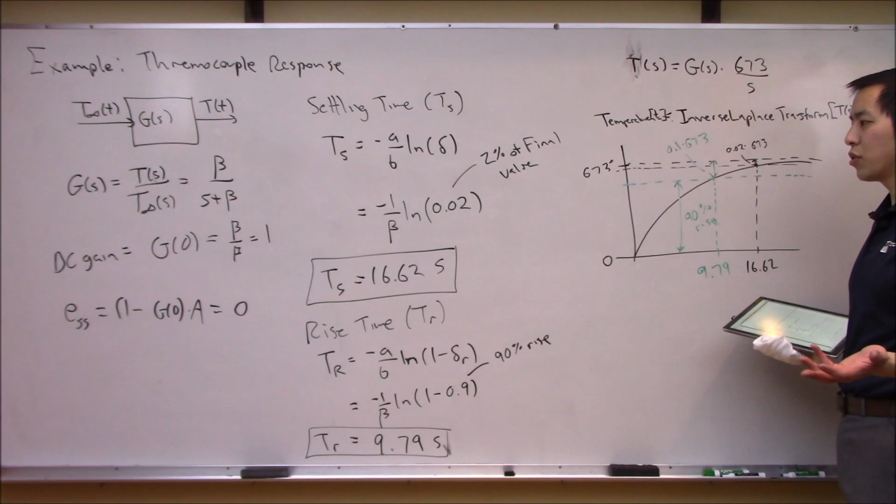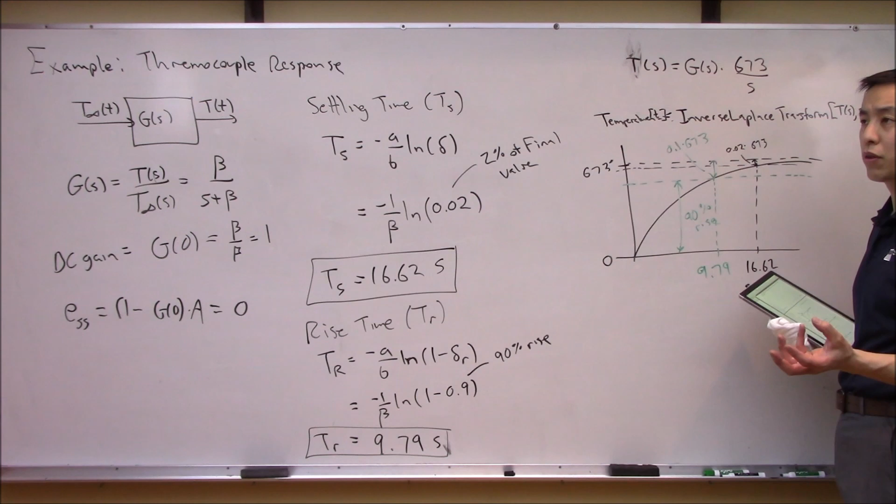I actually, boy, if you could get the initial conditions of this thing to be exactly 0, I think you're in for some Nobel Prize or something. Like, I don't think you can get the thermocouple down to absolute 0. It started at 25 degrees Celsius, which was, I don't know, 25 plus 273 Kelvin.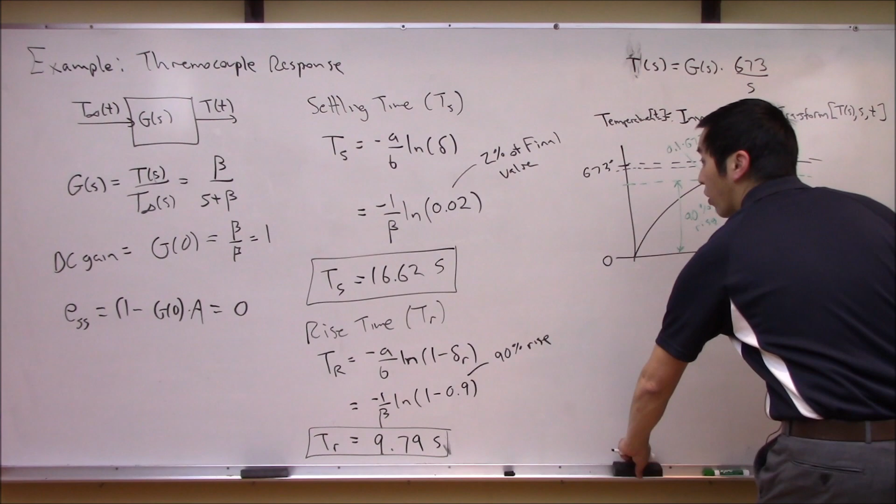So let's actually look and see that, you know what? It's actually not going to matter here. What I mean by that is, let's draw a similar picture here that more accurately represents what we want for our system, which has a non-zero initial condition. So again, maybe we should have labeled this.

So this was our settling time and this was our rise time. You can think of these as using zero initial conditions. Now, what's more accurate here, like a better picture of what

reflects the physical system, and the experiment that we did over there on the stove is, again, you've got time on this axis, temperature on this axis, but the thermocouple started at some time zero here at some initial temperature. It started here, and we know it's still going to go up to T infinity, to the step input. So again, let's draw this asymptote. And now we know this is what it's going to do.

So this is more accurate. So in this picture, I might want to ask, what's the rise time and what's the settling time? Now the only thing that's different here, and I hesitate to use the word different, it's really just a difference of how you would define the change. As long as we define the change as from where you start to where you end. So in other words, this distance, maybe I should have come up with something a bit better here, but this, let's call this your total change, delta temperature here.

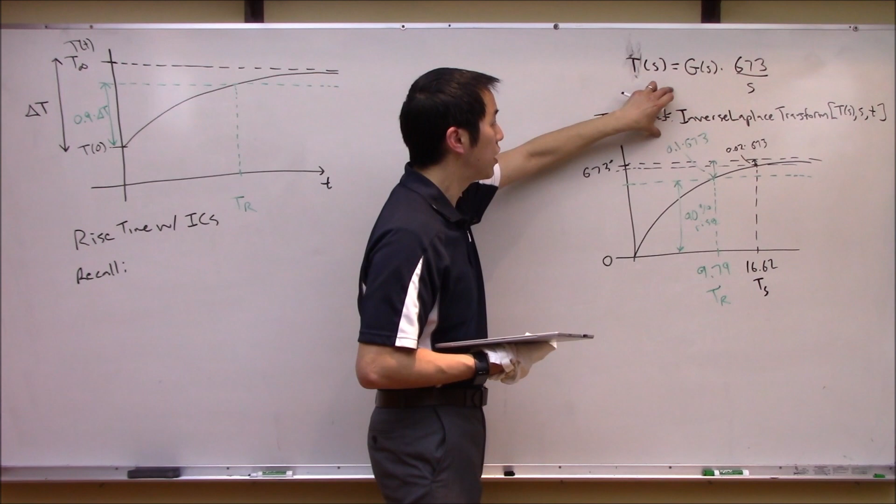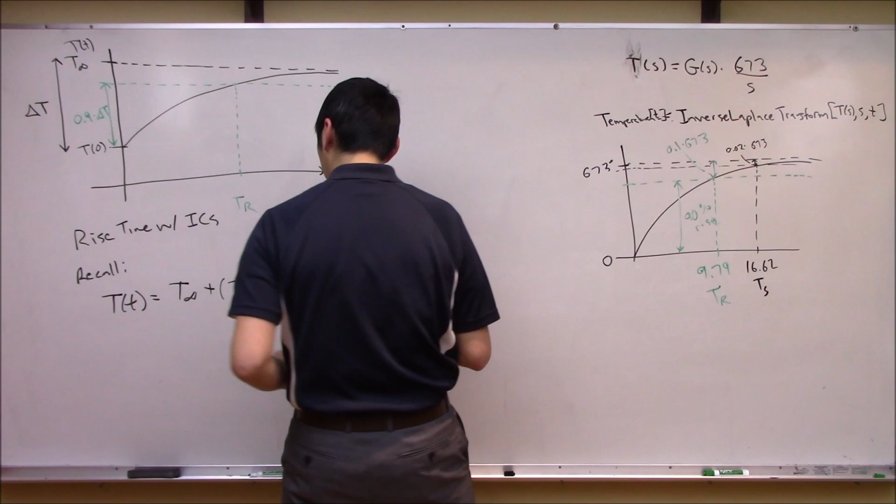Instead, what I would do is the full Laplace and not make any assumptions about the initial conditions. So in other words, what you would end up with here is temperature as a function of time. This is going to be T infinity plus the initial condition in temperature minus T infinity, times e to the minus beta t. So this is the equation of the black line here. This is the temperature at any given time t.

So the temperature at the rise time, let's call it TR. What did I use here? Maybe let's call it lowercase t so we don't end up with so many of these things. Actually, no, let's go with this because this is what I've got in my notes here. This is really what I'm trying to do here. I want to look at it here. So this time, I'm looking for the temperature at this time.

So in other words, I want this y value up here. So there are two ways we can get that. One is I can take this expression here and just plug in everywhere I see lowercase t, plug in lowercase t rise. So this is T infinity plus T0 minus T infinity, times e to the minus beta t rise.

Okay, the other way I could get this y value here is this y value is just T0 plus 0.9 times delta t. So I could also write this as, wait a second, where did I, oh right, yeah, this is also T0 plus 0.9 times delta t, big delta t.

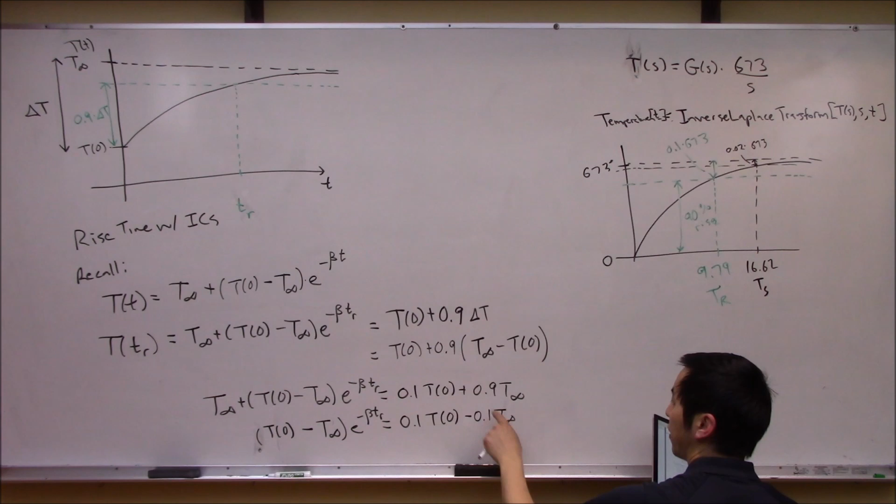Great, now let's divide both sides to solve for this E term. Maybe I'll do this right over here so we can keep both pictures up. So we end up with e to the minus beta TR is equal to 0.1 T0 minus 0.1 T infinity, all over T0 minus T infinity, right?

Okay, so I think we're there, because if you take the natural log of both sides here and simplify a little bit, I'll skip these couple steps, but I think we're basically there. I'm trying to solve for this TR, so I'm going to take the natural log of both sides, get that beta on the other side, and what we end up with is TR is going to be natural log of 10 all over beta.

So again, all you've got to plug in is your beta. If you remember, that was 4/17 in our case. So you plug all this number in and you end up with 9.79 seconds.

And again, you compare these two: the rise time with the initial conditions and the rise time with no initial conditions are the exact same values here. So what's really awesome about this with the linear system is that the calculations of rise time and settling time don't matter if there are initial conditions or not, as long as you're correctly and carefully taking into account how you define the change in the signal. The change in the signal to a step is always the difference from where you start to where you end. It's not always from 0.

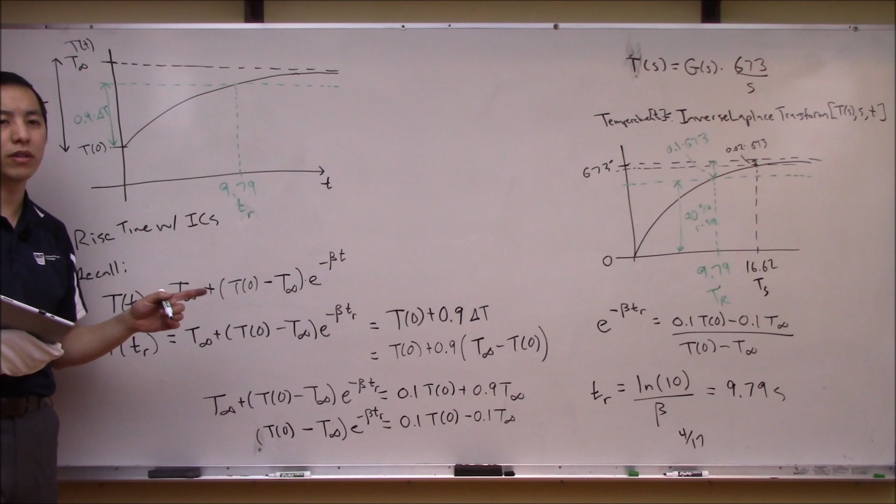Okay, great. So in this case, I think we looked at the response and the time domain analysis of the system in response to a step input in temperature. Why don't we actually look at maybe another input?

How about a ramp? Okay, so we're back here again, and I know what you're thinking, and no, I'm not going to do it again. In the words of former President George W. Bush: fool me once, shame on you, but I guess you can't get fooled again.

So we learned that a step input to this system has interesting consequences. So instead, why don't we try to subject this system to a different type of input, like a ramp input? What I've got right now is the water is actually cold, so I can put my finger in here without a glove and it's totally fine. But now what I want to do is subject the system to a ramp input. In other words, let's increase the temperature of the system linearly. So I'm just going to crank the stove on.

There we go, so it's on and the temperature is increasing. Now let's go use our thermocouple, our poor man's thermocouple, which is this little junky mitt here, and my finger sensors, which have now hopefully gotten a little bit better. I'm going to dunk it in here, and now we are going to subject the system. There we go, now it's subjected to a ramp input.

So the question now is, how is the temperature of the thermocouple, aka my fingers, related to the actual temperature of the water? Is there any steady state error? Is that error growing? It's a different kind of input, right, it's not a step input, it's a ramp input, because the temperature of the water is increasing slowly at some kind of rate. So that's the question we want to maybe model on the board.

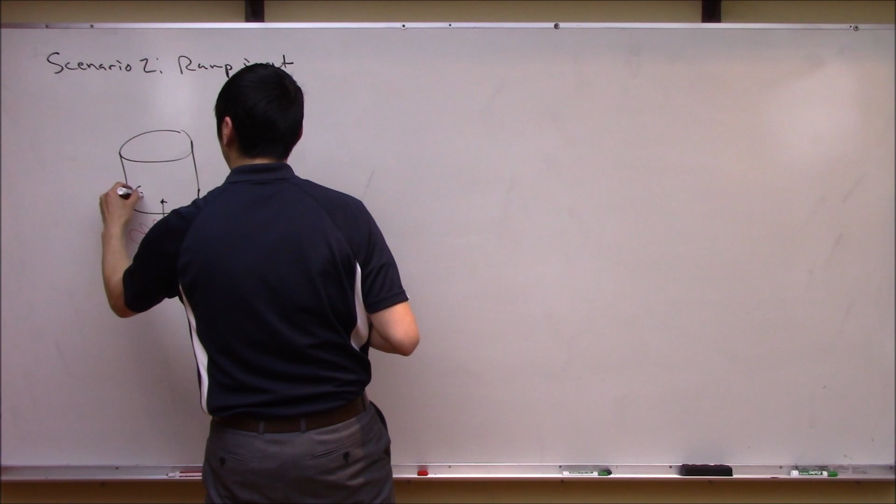Okay, so now let's look at scenario 2, and this was the ramp input. So again, the picture that goes along with this is we've got our pot of water, but now instead of it being instantly hot, we're going to light a fire underneath and heat it at a rate of 5 degrees Kelvin per second. Then we put the thermocouple inside, again with an initial temperature of 25 degrees Celsius, which when you add 273 gives you Kelvin. So this system is modeled as our transfer function, or dynamic system, where now the input temperature T infinity is a ramp. I want to understand how the output temperature, the temperature of the thermocouple, tracks the input here. So let's apply the time domain analysis we derived earlier.

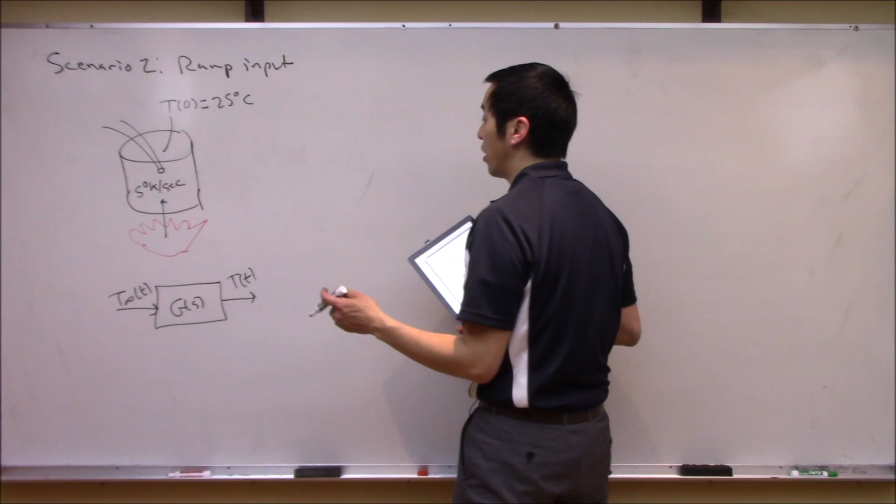If you remember, the steady state error that we showed in response of a first order system to a ramp was A minus A times C over B times time, minus A C over B squared. This was the first order system response to a ramp of slope A.

So in our case, we have A as 5, it's 5 degrees per second here. Little a was 1, I think that was the first coefficient of our differential equation. B was beta, and C was beta here. I think beta was 4 over 17 -- I always forget this. Let me make sure we get this right. What did we calculate beta to be? Beta was 4 over 17, okay.

Great, so just plug all that in. Again, we note that the DC gain of C over B showed up, and we showed the DC gain was 1. So actually we see that the steady state error in response to a ramp is not going to be a function of time -- that term goes away, and we end up with a constant value.

So again, plugging and chugging all these numbers in, you get E steady state equals -- what's the actual number? I think it's something like 21 degrees or so, let me make sure I get the number right. Okay, so this is minus 21.25 Kelvin, right?

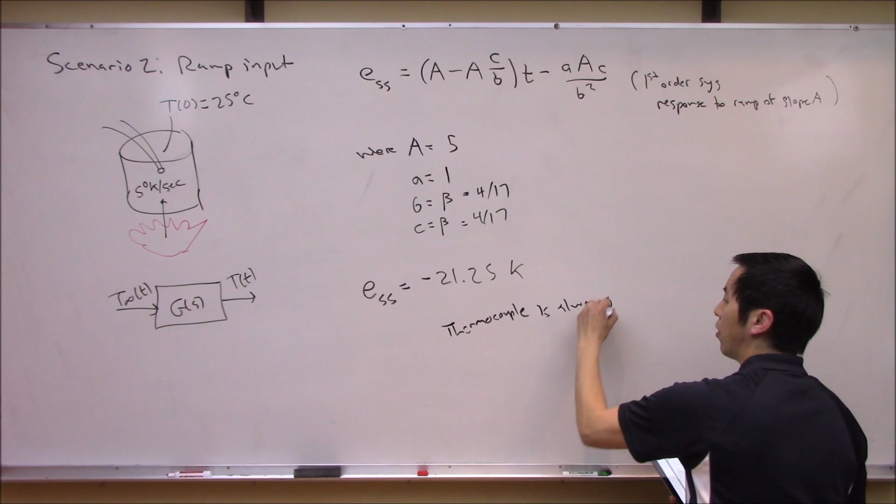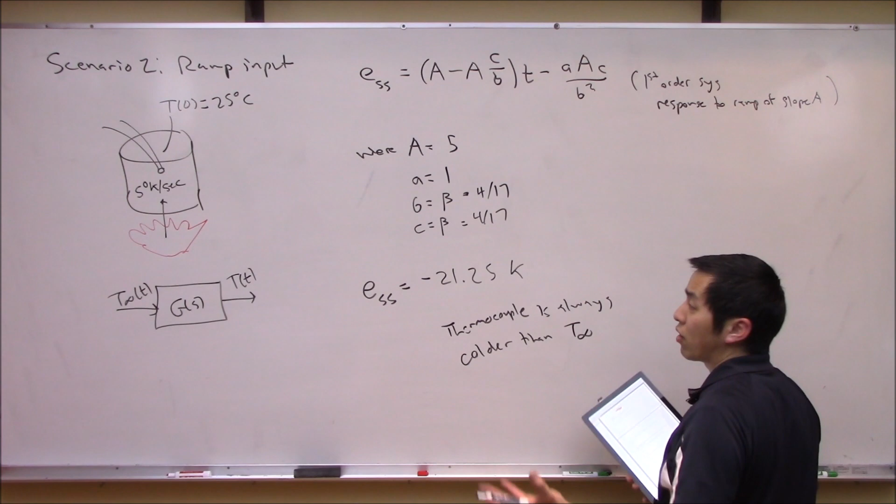So what this means here is, again, it's constant -- the thermocouple is always colder than the surrounding T infinity, than the liquid here, and it's colder by 21.25 degrees. So that's useful information, because if you knew that, you'd be able to compensate for it maybe in software. But make a note that this is going to be a function of how fast you're increasing -- how fast the water is increasing. So if it's increasing at 5 degrees a second, this thermocouple is going to lag by 21 degrees, okay.

So I'll tell you what, this might be something interesting to hop over to Mathematica and verify this by direct calculation, as well as plot the response of the water temperature and the response of the thermocouple temperature, and just see what the steady state error looks like.

Okay, so let's check that the system response to a ramp input yields a constant steady state error. If you recall, the differential equation that we derived earlier was this. So now, if the input T infinity is a ramp of slope A, let's go ahead and take the Laplace transform of both sides to get the response in the Laplace domain. This first term is S T of S minus T0, plus beta T of S equals beta A over S squared. So now solving for T of S yields -- I actually have that already prepared so I don't mess the input up trying to plug it in. Now here it is in the Laplace domain. I want this in the time domain.

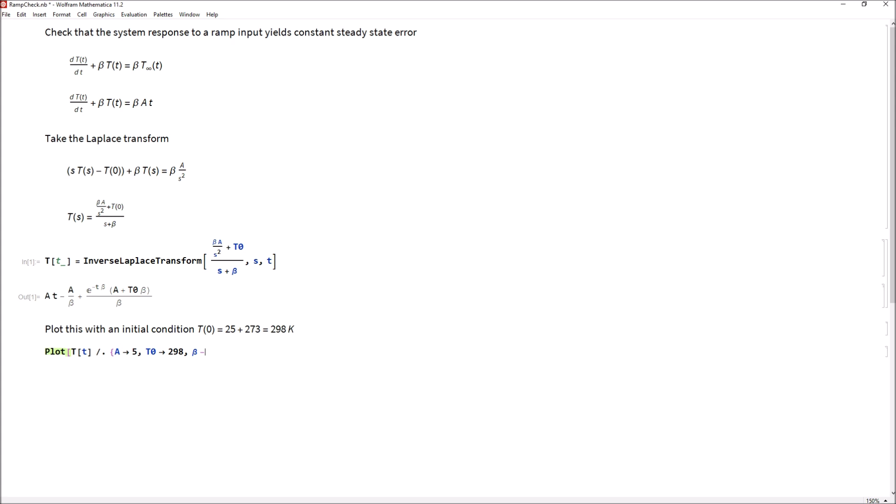How about T of T? But I have to make some replacements here. A is going to be 5 degrees per second, T0 is going to be 298 degrees, and beta, I think we said was 4 over 17. Let's plot this from time equals 0 to 100 seconds just to see what it looks like.

So there we go - here's what the thermocouple is going to do. It might give us some insight if we plot this also against the input ramp here. So the T infinity input was just A times T - it's a ramp of AT.

Again let's replace A with 5, because it's 5 degrees per second. So now if we shift enter that, here we are - this is what this looks like. You can see that the temperature of the pot of water is just rising at a constant 5 degrees per second here, and what actually happens is, look at this.

Again you can see the steady state behavior - there is a constant steady state error here, and the magnitude between these is about 21 degrees. Okay, so there we are.

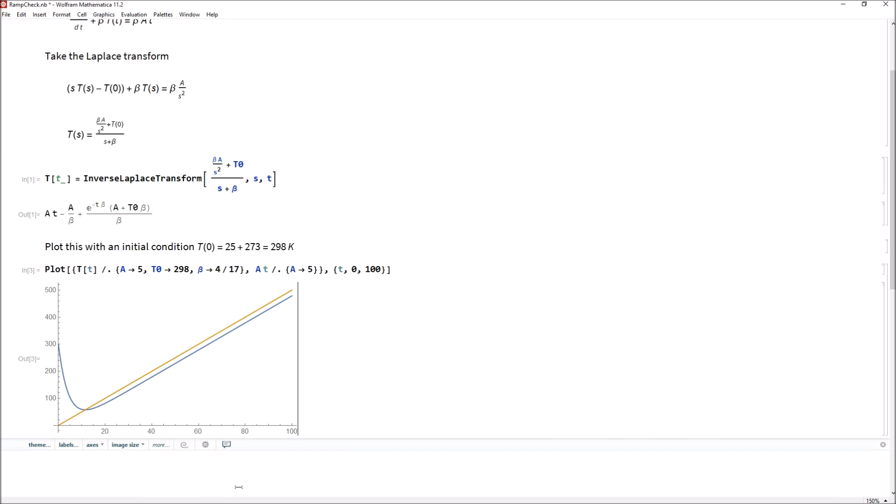That, I think, ends this example. Let's jump over and take a summary of what we've discussed today so far.

So to summarize what we discussed today, we first introduced the concept of time domain analysis and saw that what we're really trying to do is predict the response of the system without having to explicitly calculate the actual analytical response. We then discussed the difference between transient and steady state behavior, and why it's important to differentiate between the two.

We then looked at a first-order system as a starting example, and saw that it could be subjected to different types of inputs. The first thing we looked at was a step response, and we saw that with a first-order system step response, you could talk about the steady-state error of the system, as well as the settling time and rise time as additional performance metrics to measure how the system responds to the step.

We then looked at how this was also a little different with a ramp response. We showed that with a ramp response, you can also define a steady state error. You could probably define a settling and rise time as well, but it gets a little unclear there, so we didn't focus on that.

Then to tie all this together, we looked at an example of a first-order system and its step and ramp response using a thermal system. So I hope this gives you a little introduction to time domain analysis.

Note that we only did a first order system here. This is a bit of a teaser for our next video where we start looking at second order systems, and we'll see that it gets a lot more interesting because we can start defining other performance metrics like percent overshoot and other interesting behavior for more complicated systems. So that's coming up next video, and I encourage you to watch if you're interested.